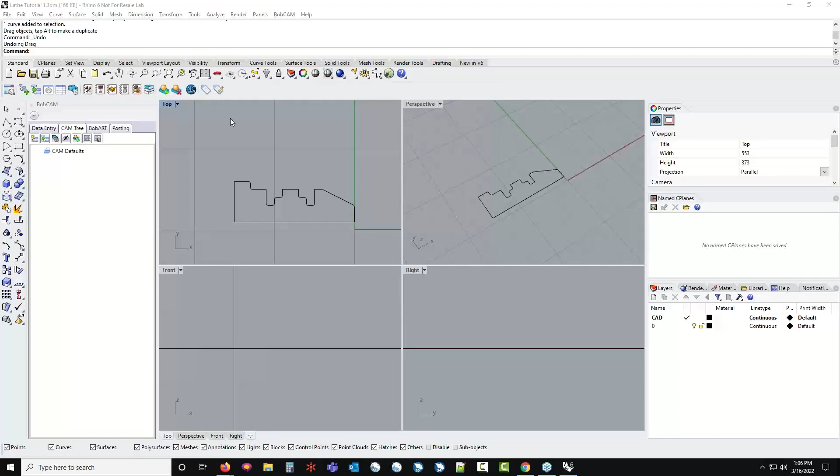So I'm just going to go right here to this top view. This is pretty much where I'm going to be for most of this. Now, I am not great with RHINO, so I actually drew this part out in our standalone software. It's just a part I use for a bunch of stuff. But I actually drew this out in our standalone and imported it as just a DXF.

So I had it all lined up inside of BobCAD in our standalone version, and then I just imported it into here. So I'm doing everything from the top plane. The only thing we really need to pay attention to is when we set up the job, we need to make sure we have our Z and X right here and not our X and Y, which the turning system should do automatically for us.

So I'm going to go up to BobCAM, and then I'm going to go ahead and load the help right here. So this should load the online help. It may take a minute with the way my computer's been acting. Hey, that's not that bad. Okay, I can deal with that. So I just want to pull this up, and I'll just make this big. I don't need full screen.

Every time you launch the help system in any version of BobCAM, but in BobCAM for RHINO here, it'll always take you to this introduction page. And right here on this introduction page, we're going to go down to Using CAM. Now, right here under Getting Started Machining, we have this Read Me First CAM Quick Guide. And I'm just going to open that up.

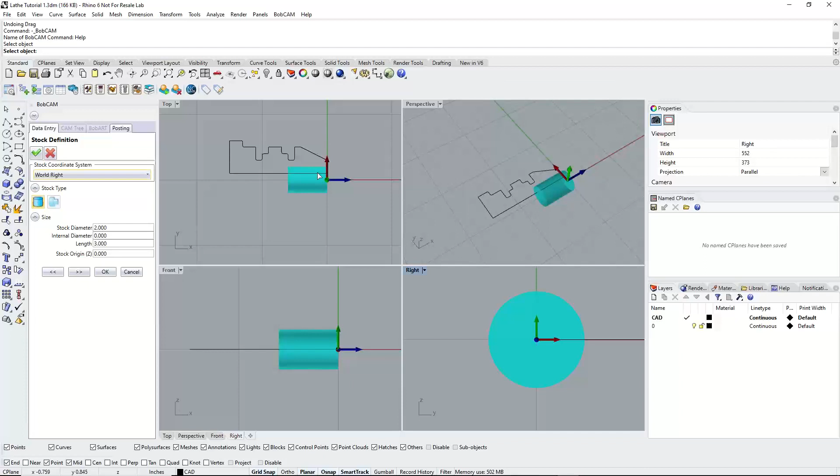Now, the first thing I like to pay attention to is whether it's showing up in the correct coordinate system compared to all these. You don't really have to compare it to all of them, but we want to make sure this is running down along what would normally be our x-axis for our top plane. But you have a choice, depending on how your geometry is situated. You could use the world right coordinate, the world front coordinate, or the world top coordinate, so it's whatever you want to use. I'm going to go with world right because that sets my z-axis down the center of the part and my x-axis along the part. So I'll go with that.

Now I'm going to bring it back to the top view here. So for my stock diameter, I'm going to go with 6 inches. And for the internal diameter, if there was a hole already in your stock, you would want to define that hole. You can see if I put this at, say, a half inch—let's go a bit bigger, is that three-quarters of an inch? This will help me anyway because I need to know what size that is. Looks like it's a 1-inch diameter hole down the center. So you'll see, if I go to my perspective view, a 1-inch diameter hole down it. That would be if you're starting with a piece of stock that already has a hole in it.

I only really did that because I forgot what diameter that hole was supposed to be, so it's a half-inch radius, 1-inch diameter. That works for us, so I'll zero that guy back out. And then for the length of the stock, you're just going to put however much you need. So if I say the length is 8 inches, that'll work. Now you could go a little bit more than that as well—something like 9 inches will give me that little bit extra so that when I do my cutoff, I'll actually see it cut off, and I'll see the rest of the material, whatever's left in the chuck when it falls off.

And then the origin right here—so right now the origin's at this center point, but if we want to do any bit of facing, we need to add a little material to face off.

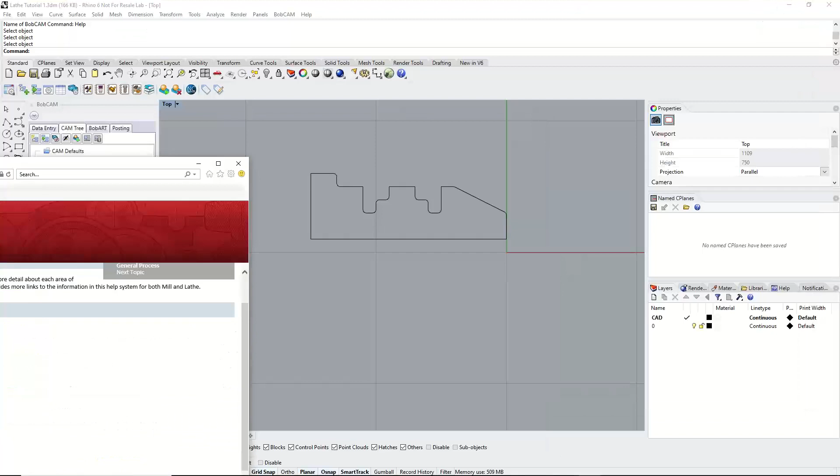Now, the other thing is in step 4 here, they go right into making toolpaths, and you absolutely could, but it does make life a little bit easier if we know what tools we're planning on using. Go and set up the tools before you start the job. So I'm not going to set up every tool, but I'm at least going to set up the tool I'm going to use for roughing and probably finishing and the grooves, which is most of the tools.

We'll just do it. So you right click here on turning tools, and we have a tool library and a tool crib. The difference between the two is the tool library — the easiest way to think about this is it's that shelf or drawer somewhere in your shop that has all the tools that you own. These are all the tools available to you. The tool crib is those tools being taken out of that drawer or off that shelf and being loaded into the machine. So I want to go to the tool crib because I want to then add tools from the library to the crib.

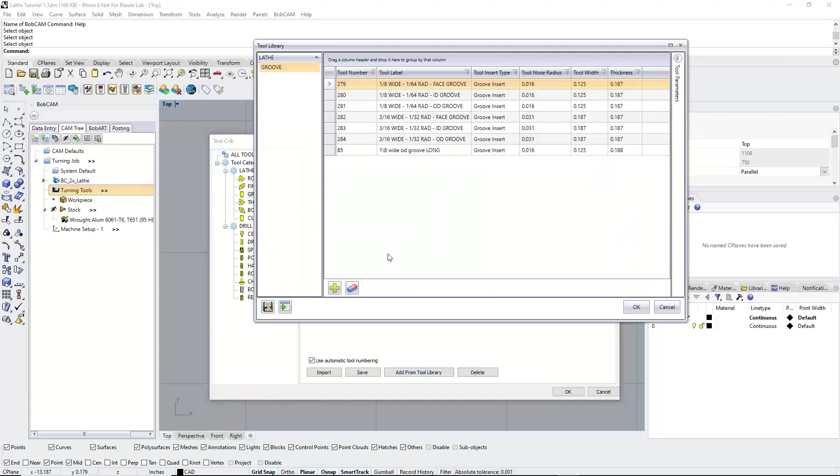So we're just going to go right here to our rough and say add from tool library, and I'm just going to go with a pretty standard CNMG right there. Top one should be fine, hit OK. We can use some pretty basic tools on this one. So for our finish, we're going to add from the tool library — this is going to just be a VNMG, and I'll hit OK. Now I want to go to my grooving tool and add from the tool library, and I'm going to go ahead and pick this one right here.

Let's take a look at this one. So if I open up and look at the tool here, this is an 1/8 inch wide OD groove, and I specifically put long, meaning the holder is a little longer right there. All I did to make that was make a new tool, and then when I was defining this groove, I went down here and said let's edit that tool holder. You can see right there, A is the length of stick out on that groove. So I can go in and say this is 1 inch, and it'll create it and extend it a little bit more. If I went 3 inches, like that, that would give me another tool, which we kind of have already.

That's going to be our cutoff tool. So I don't actually need this one. I'm just going to trash it real quick.

I'm going to pick my 1/8 inch wide, so it's an 1/8 inch width for the tool. The tool length is 1/4 inch tall, kind of the length of the insert. The side angle is just 2 degrees, and there's no tip angle. Our reference point's off the left corner there, and that's the holder we're using. If I edit this one, you'll see, yeah, it's 1 inch. So that's just adjusted. I actually think I did this part in the getting started videos for this thing, so that's why this tool exists already. I'll go ahead and just hit OK to add that one in.

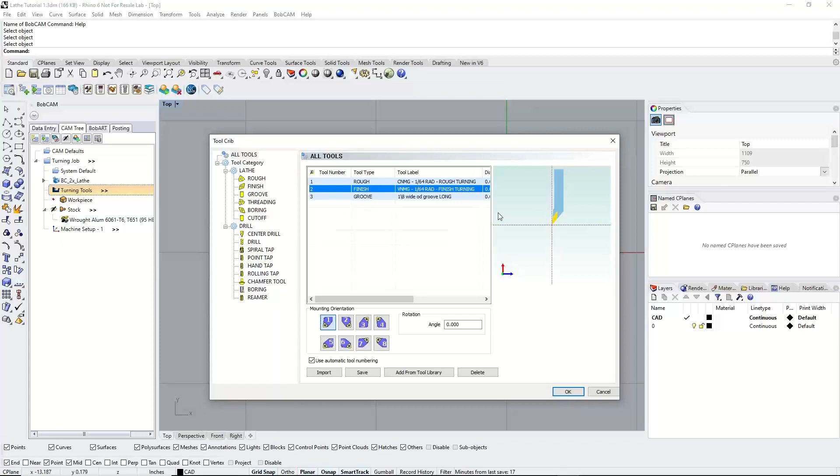So we have, if we look at all tools right now, we have our rough, just a CNMG. Finish, just a VNMG, which we honestly probably don't need. We could probably just use the CNMG, but that's not going to hurt anything. And then we have our groove for doing those 2 grooves. So really the last couple tools we need is a center drill and a cutoff tool.

I'll just add those in. The drill I'm not going to add in. The system will automatically pick a drill. It's going to be a 1 inch diameter drill, but it's going to go 7 inches or so, something like that. So we'll just let it go.

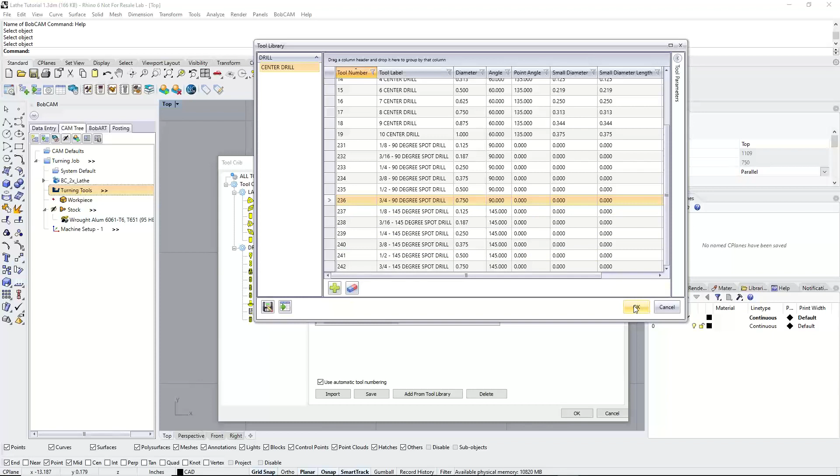We'll see it. So for the center drill, I'm going to go ahead and choose, let's go with a 3/4 inch 90-degree spot drill. Something pretty heavy. But I like using spot drills for my center drills, just so it gives me a nice clean angle. It's easier to calculate for a lot of things too. So I hit OK. There will be my center drill.

And then, yeah, we'll go ahead and just add a 1 inch drill. Now, when we do this, I'm just going to sort by the diameter here and scroll down until I find me a 1 inch, or sort by the diameter again. And we probably only have, yep, one 1-inch drill. Now with this, I'm going to double click on it and you'll see the entire size of it.

So you have a 1-inch diameter, 118 degree tip. The flute length on it is 6.375, but the overall length is 11 inches. So I want to go in and I want this to protrude out of the part a bit more because I do have a few more inches than that. So I'm going to say, I'll just do 9 inches. So we're holding on to 2 inches of it. 9 inches is sticking out, and 6.375 is what we have for our flute length.

We'll see if that's good. I might get a couple little gouges telling me that above my cutter, above my flutes, is touching the part, but we'll find out when we run the simulation. Again, I'm not putting any tool holders on any of these tools, so it's no big deal.

This is important though. So a minute ago, I was talking about our cheat sheet here that tells us to start the new CAM job and stock wizard and all that. But right here, step number 3 is set the stock material. The stock material is only used for feeds and speeds. So if you want BobCAD to figure out the feeds and speeds with turning, the only feeds and speeds we will calculate for are the center drills and drills, pretty much the same tools you can run on your mill.

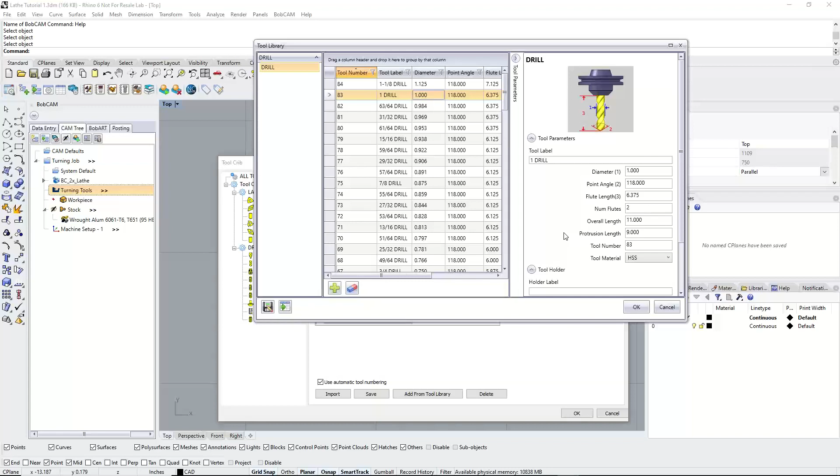So just going to go ahead and hit OK here. And there's that super long drill. And then finally, the last tool we're going to need is a cutoff. And I believe there's only one in here.

The length on it is 3.25. So if we look at the holder here, we only got 1.625. So this should be 3.25, and that's what it should look like. So it's basically a groove tool, but we use it specifically for cutting off. And my part's 6 inches in diameter, so I had to make sure I have a few inches of that. Shank length we can make.

Oh, that's the total length. Yeah, 3.25. All right, perfect. So we'll hit OK, and then hit OK, and there's that tool. So now we actually have a cutoff tool that can reach the center of the part.

And that's it. So if we go up here to all tools, we have 6 tools. Our rough and finish for most of it, our groove for the grooves, center drill and drill for the drill right down the middle, and a cutoff tool. So again, you do not have to do this. If you look at the steps, our little cheat sheet here, there's nothing in here that's telling you to set up all these tools at the beginning.

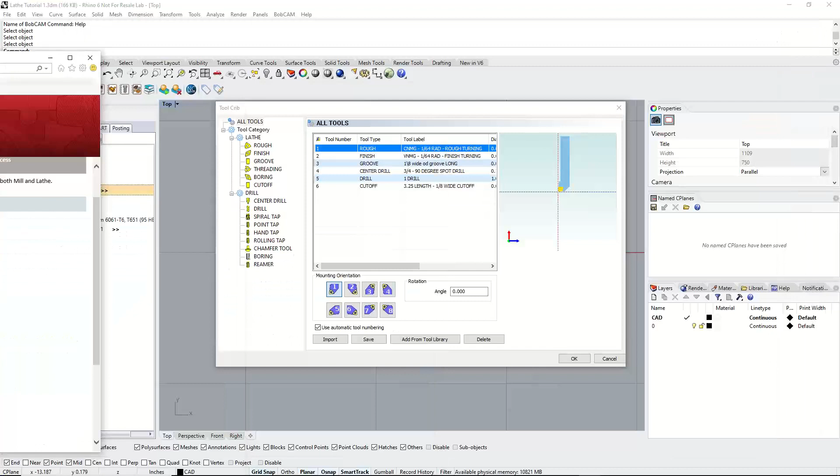But I found that if I don't have to think about the tools again, that's a great day for me. I know what tools to use when I'm roughing. I know what tools to use when I'm finishing. It all works out. So I do prefer to set up tools in the tool crib before I start machining. But I'll say that is not always the case.

There's many times when I was playing around with this earlier before lunchtime, before this whole thing started, I didn't change anything. I just started building it and making up tools. So there's 2 ways to go about it. I think setting up your tool crib first does help with kind of organizing everything and making sure it's all good. So I'll go ahead and hit OK. And now I have my tool crib.

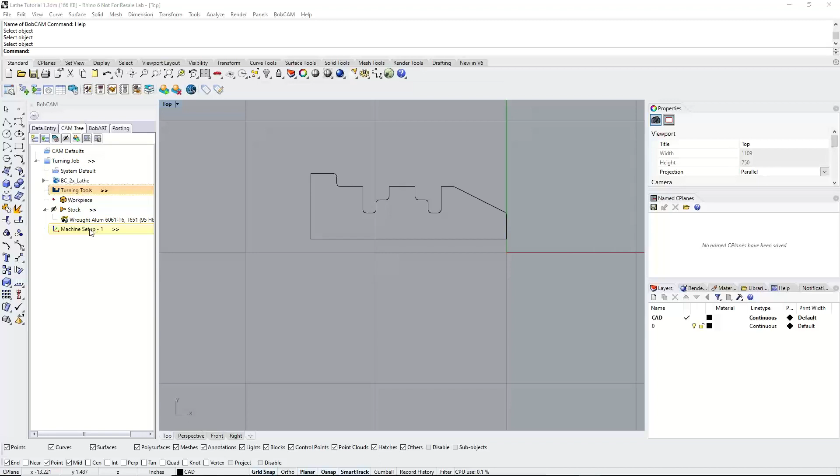From here, we have our stock done. We have our tools done. So now we are ready for step number 4. All right. So step number 4 is start making tool paths. We always go to the same spot to make a tool path. We're always going to right click on machine setup 1 here. So we right click on that.

And the first thing we're going to do is remember we added 100 thousandths to the front face. So that's what we're going to take care of first, that 100 thousandths off the front face. So I'm going to go lathe end face. For the geometry, I'm not even going to pick any geometry. I'm just going to let BobCAD figure out where the geometry starts, and it should have a pretty good idea of it. So we'll go next.

Now, because this is specifically a facing feature, we don't have to change our feature type. It knows it's working off the front face. Basically, it's only going to give us the settings for facing. So we can't change what face it is or anything like that. The rapid plane is the distance we're going to return to between each cut, so 200 thousandths. So as we make our first cut, we're going to go 200 thousandths, come in, make our second cut, 200 thousandths.

The constraints for this one, you get from stock or from custom. I always go with from stock, especially on a facing pass. The only time I really change this option is when I'm doing grooves. And I'll show you that here in a few minutes.

Now, the extension allows me to extend past the center point or start before. So we'll give ourselves an extra 1/8 of an inch. So it should see the stock and start an 1/8 inch above it. And then at the end, we're going to go past the center by, we'll just say, a 1/16 of an inch or so. And that'll just get rid of any little tit that's left on there.

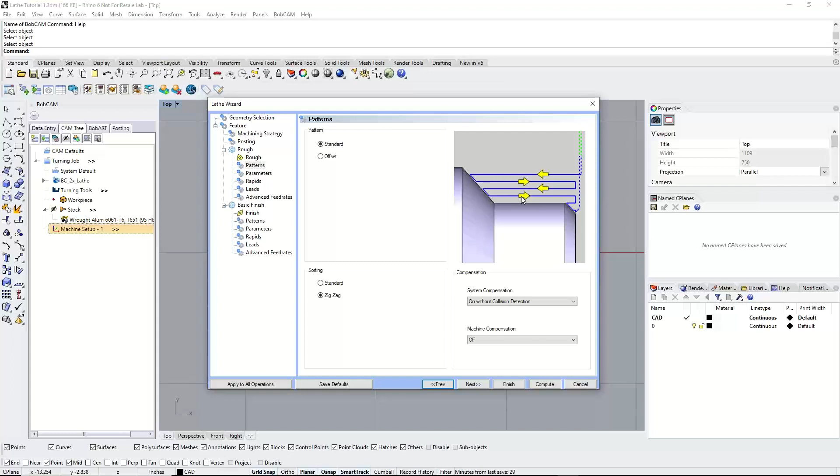The last option for sorting is the zigzag option. Instead of doing a zig where you go in one direction, you'll do a zigzag where you go back and forth. So you got your forward cut here and then a back drag cut there. So you got to make sure you got the right tooling selected for this. When I've done this one, and I've only done it a couple of times, I've actually used more of a grooving tool than a CNMG or something. So I'm going to go with standard and standard on there.

For the compensation, I don't usually use G41 and G42 on a lathe. I like to let BobCAD handle all the compensation. So up at the top, we have our system compensation. That's exactly what that means, that BobCAD is going to handle compensating this tool. Now you have three options for that.

Off, which is basically a center line cut. You're just going to follow the geometry in the exact shape we made it. Usually when you're using off, you're going to be using some form of compensation, a G41 or a G42. That's totally up to you guys. Like I said, I don't really use them. A bit of it comes from the fact that it doesn't show properly in BobCAD. It needs that compensation applied to it already, but I'm going to leave that one off.

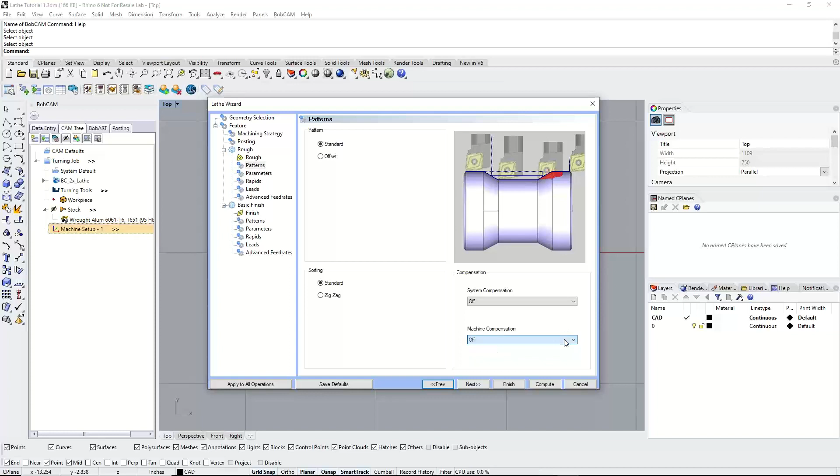The other one is called on without collision detection. So this means we are going to compensate for the tool, but we're not going to look to see if it's crashing into anything. Like that picture shows, the back of the holder and the back of the tool end up dragging across that section.

And so the one I use, because I'm not lying about my tool, this is a pretty standard tool. It's a CNMG. As long as you're not trying to trick it into thinking you've got some tool that you're not really using, the best option for me is always on with collision detection and tell it to use the tool holder. So it'll adjust the path so that the holder is clear of the part. And that's the setting I'm going to turn on pretty much every time.

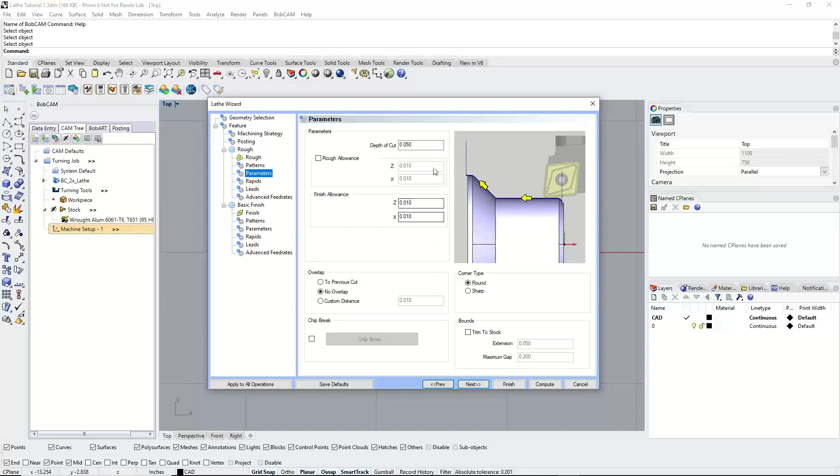So next right here, we have our parameters. This is where we see our depth of cut. So whatever you're comfortable with taking out in one pass, or whatever you're comfortable with the tool taking, that's what we're going to set up here. The allowance, this finish allowance here, this is the amount of material that's going to be left over for our finish tool to clean up.

Right here, we have some overlapping options. So how do we make our cut? The default is no overlap, and this is what you'll use. The default for facing is no overlap. But when we get into turning, what happens is on no overlap, you make your cut, you leave. You make your cut, you leave. So you can picture the finish that's going to be on here is going to be very steppy. There's going to be a lot of steps in it, kind of a rougher finish.

Now, to previous cut and custom distance, what those are doing is leading out to the previous cut, or custom distance is a certain distance that you can use to blend. So no overlap is leading out here. To previous cut on this same line is actually leading out all the way up here. This lead out that we're seeing here is for this line down here. So it's going to cut that line, feed up this, and then leave. And as you can see, that's going to leave a much smoother finish on the part. And it really doesn't add that much time to it. It doesn't really matter for us on a facing pass, though.

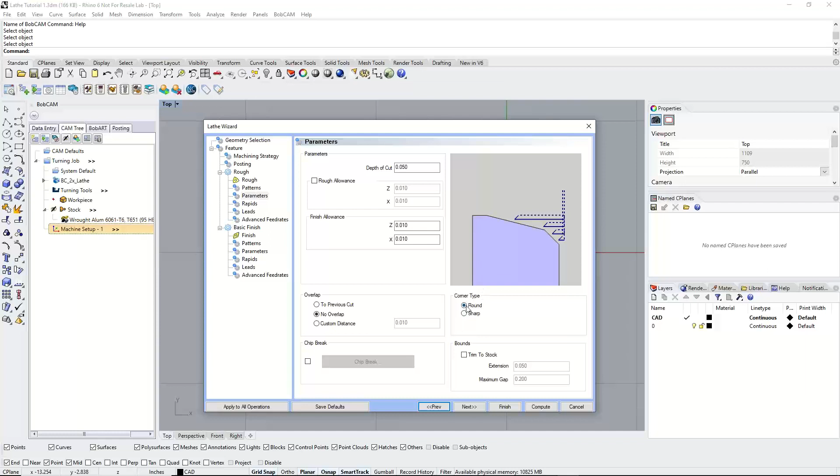Corner types, again, some of these options don't really affect a facing toolpath specifically because a face is just going to be a straight cut. So there aren't any corners on it. But if we look at the corner type options, these all apply to the next toolpath we're going to see, so it's not that big of a deal.

With this, it's just how do we interpolate corners? Do we go with a radius and make an arc move, or do we go with a sharp? Regardless of what you choose, you're going to get the corner that's drawn. This is just how do you want your code to come out? Sharp or round. It just depends on the code. But if we use round, that corner is not going to get a radius applied to it. If it was, then it would ask us what radius we want to put on it.

And there are some features like the cutoff that will allow me to put a radius or a chamfer on while I'm doing the cutoff. Right down here, again, one of these options I rarely would ever use with a face, but it's called trim to stock. Now, trim to stock is a good one if you're going to be turning a part that's maybe had some pre-turning done or maybe a casted part.

What you'd want, though, is two models. One model that represents the final finished part and another model that represents that stock. So if you look in the picture, it's real faint here, but there's stock right in there. And if we don't trim to the stock, then the toolpath is going to cut a bunch of air. But because this part's a casting or whatever, it already has a lot of that material gone. So you could say trim to the stock size, and it'll only cut where it needs to cut.

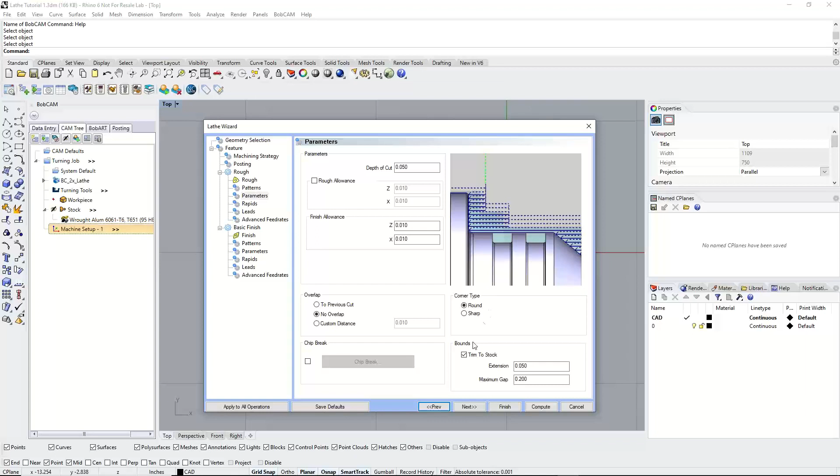All right. So I'm just going to go ahead and hit next right here for the rapids. Now, the next few pages, the rapids, the leads, the advanced feeds, we're not going to make many changes at all. The approach that we have, I'm going to use the default rapid approach. And on the exit, I'm going to use the default rapid on the exit. Now, my goal with most of these pages, honestly, is to change as little as possible. A lot of the settings are in here because they work. They work a lot of the time. So I'm going to go with the defaults on this. And if they don't work, I can always come back and change them. But there's a good chance they work.

But as we're talking about it, you can see we could come from the OD clearance plane, the ID clearance plane, or the face clearance plane. You could also rapid to defined points. On the exit, you have a rapid on exit to the tool home, to the cycle start, or to a defined point. Now, you'll see these letters afterwards, the X-Z or Z-X or just ZX. X-Z means X is moving first and then Z is moving. Z-X means we're moving Z then X. And ZX is both of them at the same time.

All right. Going to that home position, which is defined right here. Now, you may have to change the home position, but just so you know, the home position is actually stored when you build the tools. So if you ever need to change it or you want to change it for certain tools, you need to go to that specific tool in the library. And if you scroll down to the bottom, you'll be able to change the home position. Again, with something like this, though, I don't really need to change the rapids. I'm just going to go with the default rapid on exit.

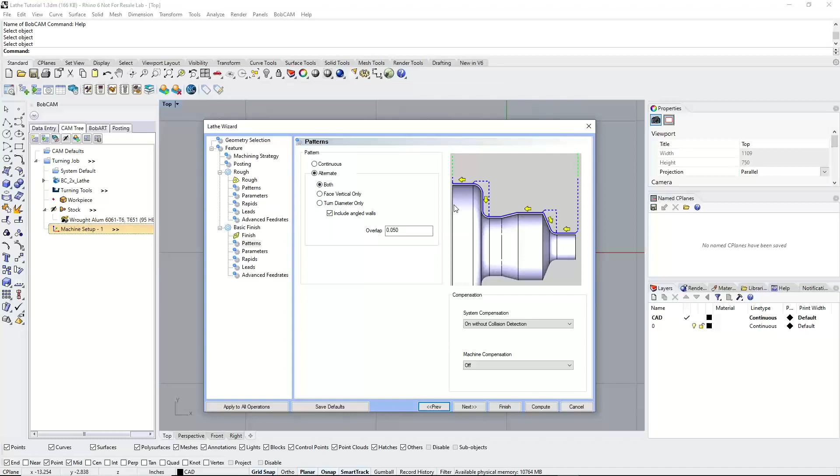Not bad, but I'm going to go with just continuous. This is a facing pass anyway. For the compensation, I'm going to say on with collision detection using the tool holder. And we'll go next again. Right here, there's not many parameters for a finish pass. If we were leaving material that we're going to come back and clean up later on, then we would add a value into here, 10 thousandths, 20 thousandths, whatever. But we're not. We're trying to finish it to size. So that's going to be a 0.

For the chip break down below, again, you could do a chip break. You could change your corner type, or you could trim to stock. But we don't have any of that stuff. So next. Here's our rapids. Again, let's use the defaults. Our leads, going to use the defaults. And the advanced feeds, going to use the defaults.

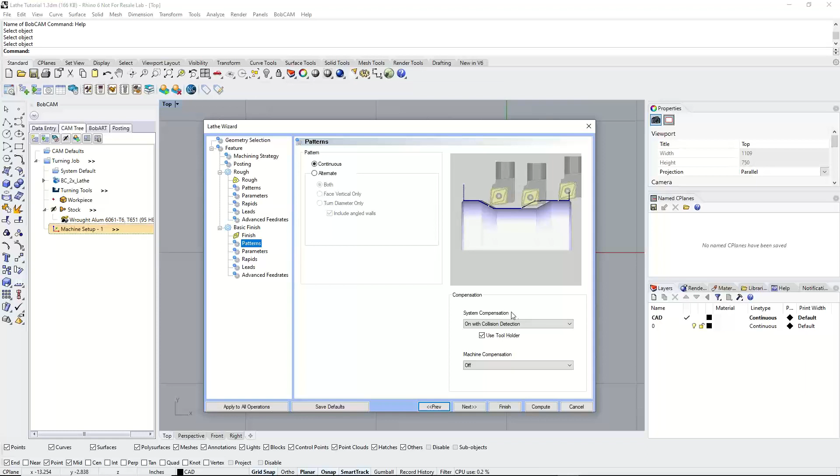Now, be aware that this option right here, the compensation option on the patterns page, does make the toolpath take a little bit longer to calculate. But for me, it's worth it because it adjusts the path to make sure everything can cut properly. So I'm just going to go ahead and hit compute.

And this is taking a while just because my computer is not happy the last couple days, so I'm just dealing with that right now. So, all right, we're going to let this finish calculating here.

Oh, Mark, you're back. Yeah, it says you popped offline here a minute ago. Not sure what's going on. Did we kick you off, or was it your internet?

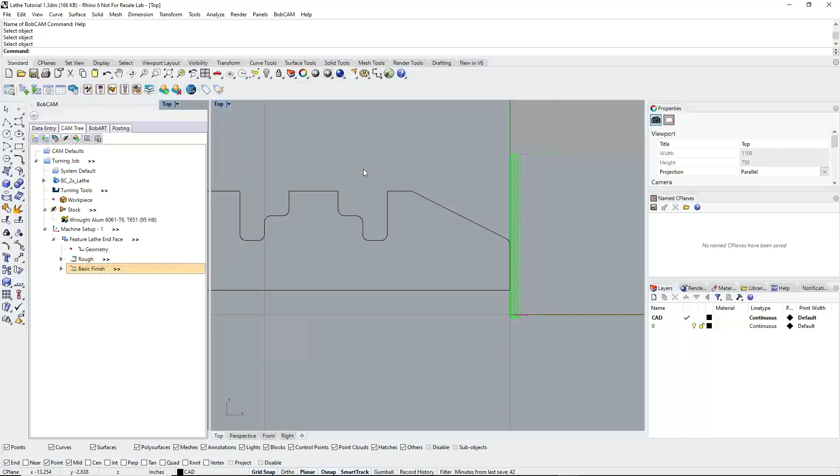And there is our toolpath. It's just going to go in and make the cut. Give me 1 second. I want to look at some settings for BobCAM here. Move over a little bit. There we go. Did I get it? All right, good. I thought this had the new cam tree in it. What is going on?

All right, give me 2 seconds. I want to go to, where is it? Settings right here, current settings. That's not the settings I wanted. These settings, I believe. User interface, office blue, okay, cam. All right, there's classic, that's what I've been looking at. I want to go to the extended cam tree here. And I want icons. I want it all to the right. So yeah, let me hit apply. And okay, that's what I want to see.

Oh, you're on your phone. I got you. Cool. All right.

So right here, I just extended my cam tree so I could use these blank and unblank options. I don't remember when I would have turned that off, but apparently I did at some point. So yeah, it lets us visualize a little bit better what's seen and what's hidden.

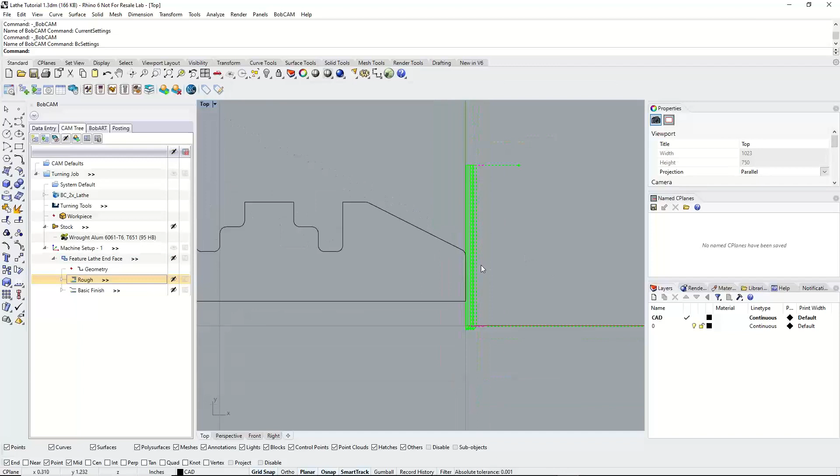So if I blank this out, there we go. We have our rough pass right there. So you've got all those passes, a few of them, and then our basic finish right there. You'll see we're going past the center line by just a little bit there, and that's good. So now I'm just going to shrink that one up. That's how I know for myself that I'm done with it.

So now I'm going to right click on my machine setup one, and this time I'm going to go to Lathe Turning, because what I want to do is turn down all of this geometry. Now notice I'm going to pick everything.

I just have to pick the little fillet in the beginning there, that little fillet there, and this edge right here. And look at the chain, you'll see we're starting here, going around.

Now you'll notice I picked the grooves. We do pick the grooves in BobCAD because when I hit OK and hit next, on this feature page here, we have this undercut section. Grooves are seen as undercuts for the system. So we can say, let's go ahead and remove primary undercuts, and what that does is tell the system to ignore any turn grooves. If we were to say remove secondary undercuts, you'd be removing any face grooves that are on your part. If you have them both checked, you're removing all turn and all face grooves.

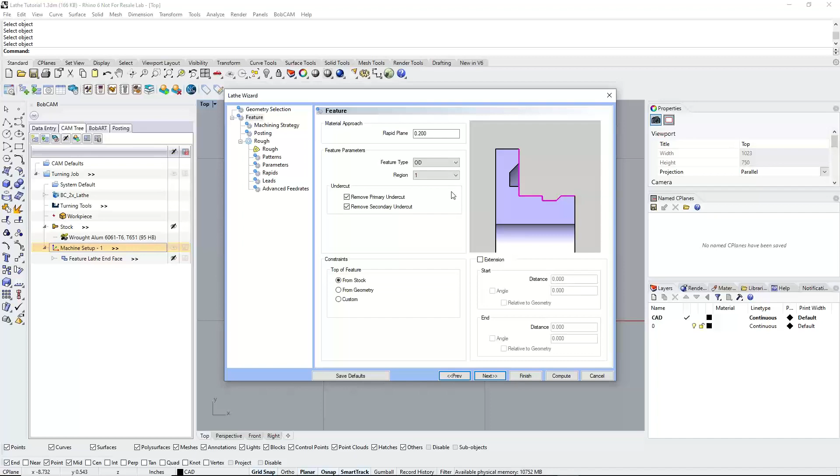Now, if you have angled grooves, there's no way to ignore those. The only way to really ignore some sort of angled groove would be to draw a line across it and then pick that line as part of the geometry. So it works for turn and face grooves, but if you have any angular grooves, you'll have to draw a line over that. So I'm just going to turn both those on. I don't have any face grooves, but it won't hurt anything.

For the rapid plane, it's 200 thousandths for our return every time. We have our feature type. So this is actually one of the easiest ways to control the tools.

So I'm doing an OD cut, so it's kind of aligning my tools as if I was cutting for an OD part. If I was to say ID, it's actually going to rotate and flip my tool around so it's facing the correct direction. We also have our front face options and our back face options.

And you could choose with OD, I could say OD region 1 is kind of the, we'll say the right side closest to the face of the part. Region 2 would be working more close to the chuck of the machine. So you'd be coming in and machining your way out. Basically, it's the flip of your tool.

So right here we have our constraints. Because this is a pass, this turning pass, that's basically going to be my material removal, my big material removal. I'm going to tell it to use the stock as the top of feature, so just recognize the stock and go machine it away.

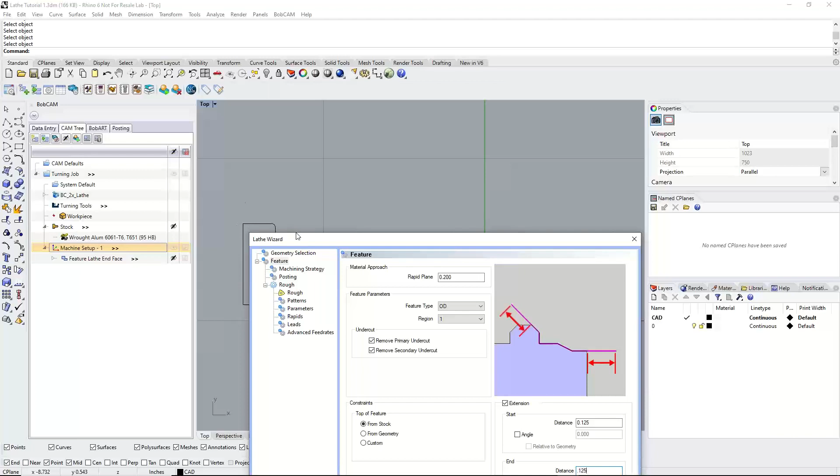The other thing I could do is add extensions onto here as well. So if I want to start a little bit before the beginning, kind of get the tool in position before, and maybe go past the end of the part a little bit. So I'll go, let's go distance, we'll just do an 1/8 inch. That should just extend this to go past here, just a little 1/8 inch more. That's helpful if you're doing a cutoff. My stock right now is 6 inches, so it really doesn't matter. I'm just going past it a little bit more.

For the machining strategy, once again, we're going to go with a rough/finish. You also have options for a pattern repeat, which is basically the finish pass being offset and dropped in, so you're following the same shape every time. I'm going to go with rough and basic finish here.

Next, right here again you have separate moves or canned cycles. That's really going to be dependent on the post-processor.

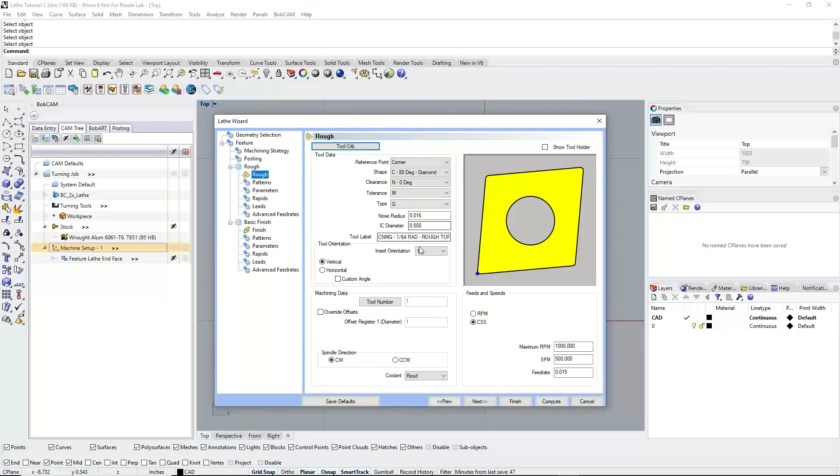Right here, we have our roughing. So again, I'm going to use my CNMG to rough it. No changes pretty much on that page unless I was changing feeds and speeds. That's got the tool, it's got the right orientation. You can look at the tool and the holder together right there. Looks good, so we'll go next.

For the patterns, again, just like with that facing toolpath, this is essentially this roughing and basic finish toolpath anyway. In the old versions of the system, we didn't have just a specific face.

The main reason why there is a specific facing toolpath is because it automatically recognizes the geometry. It will automatically go in and do that face cut, recognizing how much material is there, and then you just go cut it off.

It's the same options. You've got your standard and offset for your pattern, and standard and zigzag for your sort. I'm going to go with standard, and I'm going to say on with collision detection using the tool holder. That's a setting I turn on all the time.

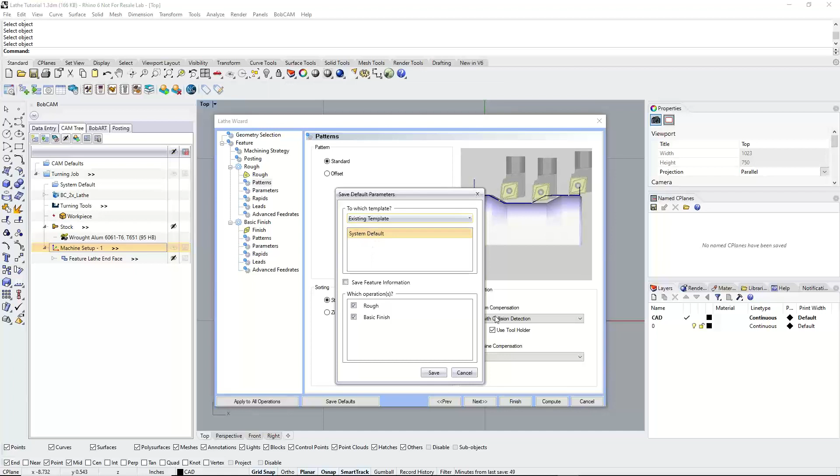I don't usually do any saves on, well, this is my work computer - I save stuff on my personal stuff. But if you know this is an option you're going to use a lot, you can come in here and say save defaults. You can save it to the current template, or to an existing template, which overrides the setting on the system level, on the default level. Every time you do this, it'll have that. You'll say you want to save it for your rough and your finish. For me, a shortcut so I don't have to change it on the next one...

...is this button down here in the bottom left: the Apply to All Operations button. So Apply to All Operations is going to copy the settings from here to these settings down here. It just copies it over so I don't have to make that change twice at least.

After that, we'll hit next. We have our parameters - depth of cut, again, whatever you're comfortable with. The allowance, you have two different allowances. The rough allowance is used basically as a rough pass. I use this when I do the pattern repeats. But for this one, I'm just going to go with a standard normal allowance, leaving 10 thousandths on every surface, and that's what my finish tool is going to clean up.

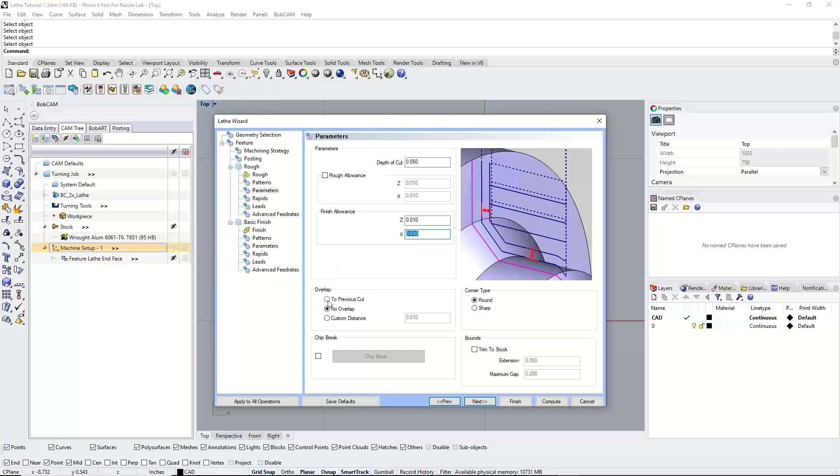On the overlap, I like to use previous cut when I'm doing these cuts here, just because it gives me a semi-finished part before the finished pass comes in. I'm not going to have a bunch of steps in there from the initial roughing.

On the chip break, I'm not going to do any chip break right now. Corner types, no changes. And then the bounds, we could say I want to trim to stock if we had a model that represented that. We don't have that model - though you can get that model from the simulation and actually use it. So I'm just going to hit next for now.

For the rapids, again, we're just going to use the defaults. There's no point in changing it if we don't have to.

Right here we have our leads, so we could go parallel or angle. Again, just going to use the defaults. If they cause a problem, I'll fix that problem, but they usually don't, so no point in changing them. Advanced feed rates, no changes.

And then there's our finish. Once again, we've got our VNMG right there, 64th rad - what we planned on using for finishing anyway.

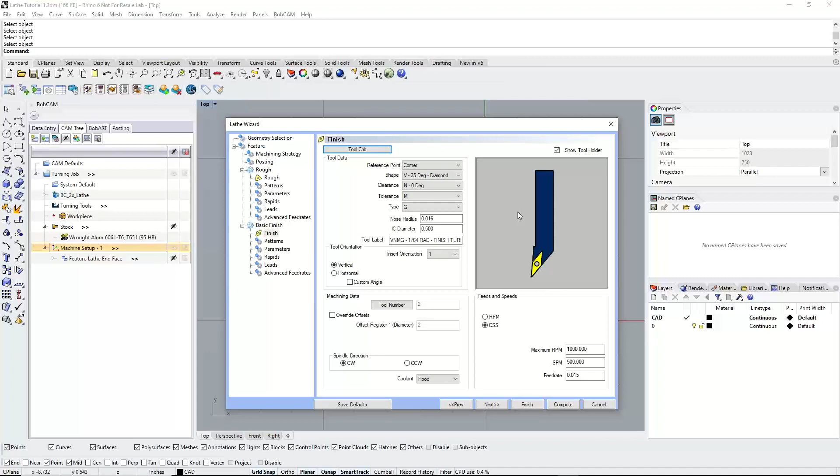Next, for the patterns, I'm going to go with a continuous cut, but again, you could go and do that alternate cut where you do the face verticals separate from the turn diameters. System compensation is set because I used that Apply to All Operations button there.

The parameters - we have our finish allowance set to 0, so we're finishing it right to the wall, and our X allowance right to the floor. So it should be a nice finish here.

Next, on the rapids page, we have our default rapid on the approach, default rapid on exit - we're going to use that. Leads, parallel, angle, both set to 100 thousandths - we're going to use that.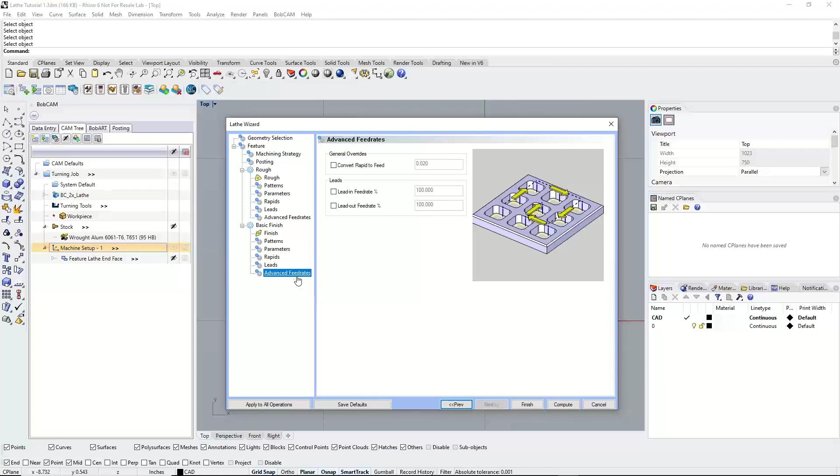Again, try not to make these changes if you don't have to - it makes it a few less things to worry about most of the time. And again, advanced feed rates, no changes. So I'll hit compute, and again it will take a little bit to compute, but it shouldn't be too outrageous.

If your computer's not having a bad day like mine is, it'll actually compute faster because it's not having a bad time. I'm supposed to be getting a new one soon. I just keep holding onto this one.

All right, so here is our rough pass. We're just going to go in and rough all that geometry out of there. And then we have our basic finish, so we'll just turn and cut.

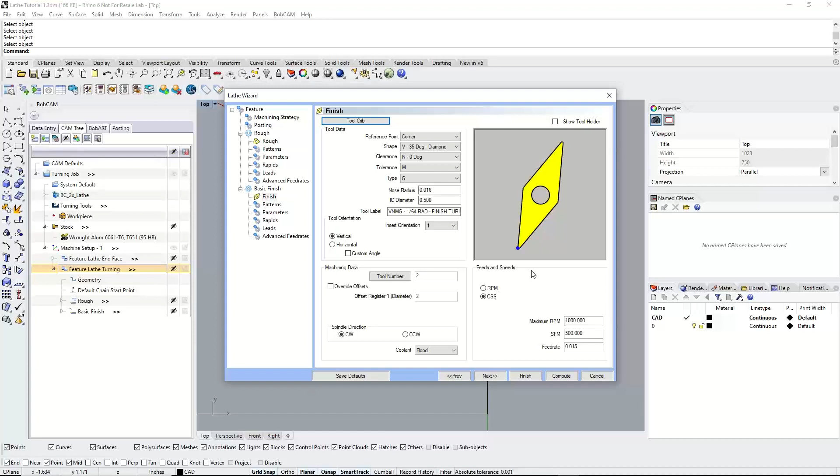Now a lot of guys get nervous when they see this, the toolpath inside the geometry. The reason it looks like that, and I can show you this, is because all the toolpath is based off that point right there, the hypothetical corner on the tool. It's what you're calculating when you're setting your tools up anyway. Excuse me, oh I didn't mean to hit compute, sorry guys.

So if I right click on this basic finish here and say backplot, my tool is going to be up there. Let me next my way into here. Next, so there's my tool, I'm going to turn it shaded. You'll see as we touch, the hypothetical sharp corner is actually this corner right here. So when we get up to that arc, the reason it's like that is because that hypothetical corner is down further. That's what we're calculating everything based on. So when you see a toolpath inside the geometry, it's not a bad thing, it just means the edge of the tool is cutting along the geometry.

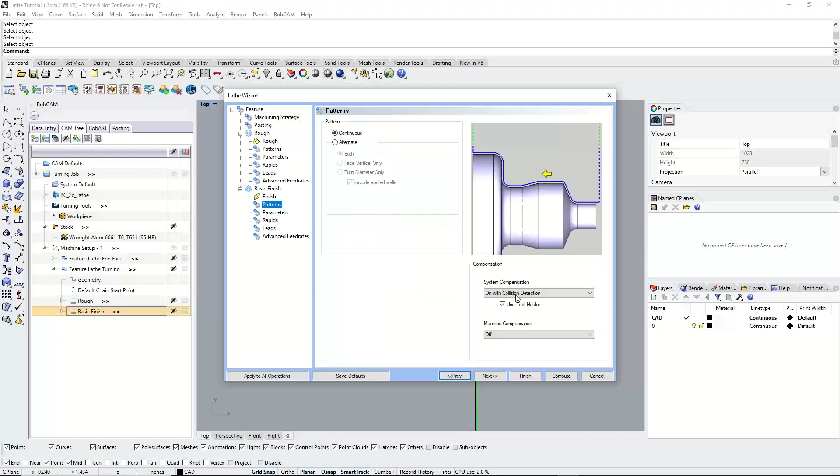So yeah, there's the only other way to get it to run without doing this - this is that compensated tool. If you go in and change this, let me edit this right here. If I go down to the patterns on this one and just turn this off and hit compute, the rough still has to compute, but the finish is now going to be pretty much instantaneous.

So now as the tool runs, I'll backplot that. There it is - when we get to right here, the tool isn't actually touching the part, it's not touching that wall. That's because normally you'd be coming in and then compensating it with a G41 or a G42. So I'm going to turn that system compensation back on, and I'll just recompute real quick.

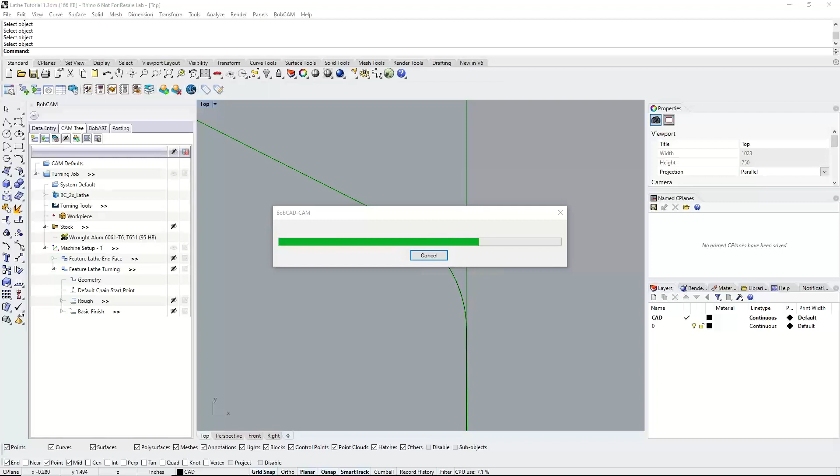All right, and there we have it. So there we go, looks good. All right, now we'll go ahead and just shrink that up, and then the next thing is these grooves.

So for the grooves, I'm just going to right-click and say Lathe Groove. We'll select our geometry, and I'm just going to drag a box over this stuff. Whoops, didn't mean to grab that one. Just going to drag a box over those two areas, and then I'll fill in the gaps I missed. There we go, and we'll look at our two chains.

So we'll see both of them right there. You can do both your grooves at the same time, or you can make them separate features if you wanted to for whatever reason. If you were going to make them separate features, the way to do it would be to just program one and then copy and paste the toolpath for the other. But you don't have to - you can do both your grooves at the same time nowadays.

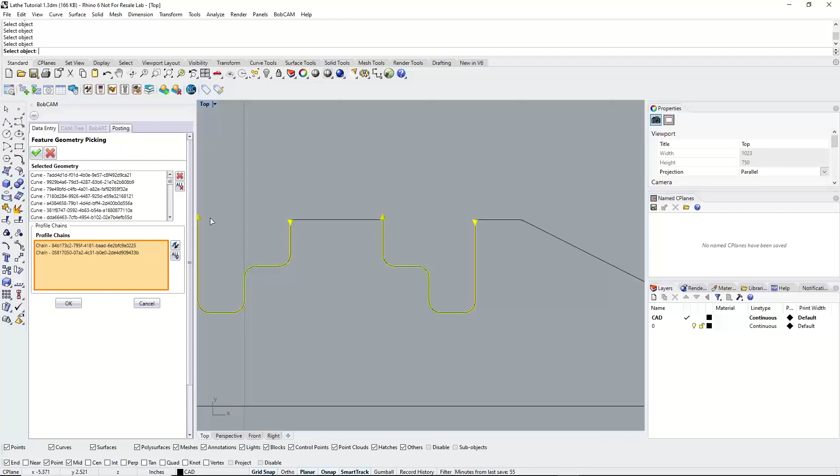So I'll hit OK and go next. Right here's our rapid plane once again, so that's pretty much the height at which we're going to return when we connect these two grooves. They are OD grooves, we're doing region 1. Region 2 would be kind of flipped the other way, so your tool would be flipped 180, but we're going to go region 1.

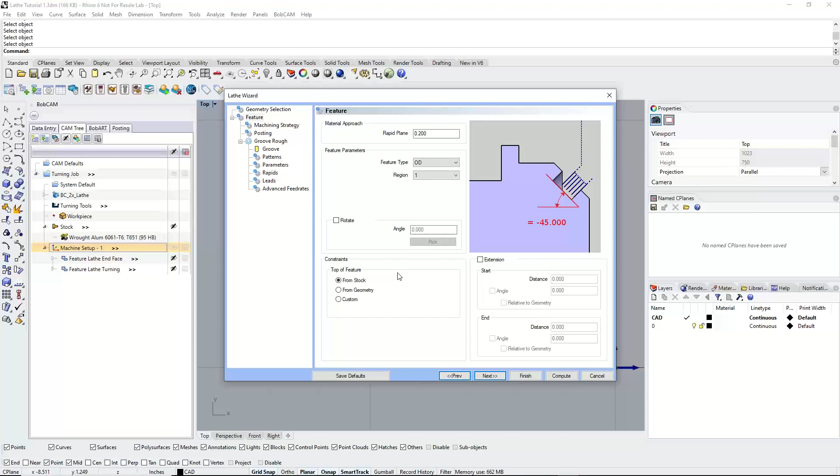If you did have angled grooves, you can actually set the angle of the groove, and then set up your tool to match that angle when you go in and cut it. But for the constraints, for just about everything - your normal turning, your facing, pretty much everything - you're going to go from the stock. But for the groove, we want to go from geometry. What that's doing is looking at the height of the geometry we picked, and that's where it's starting all the toolpath. If this was up any higher, if we had this extended up, it would actually start the groove higher - so it's actually looking at the geometry.

And so I'll just go next. I don't need an extension on this one. We'll do a groove rough/finish, which is going to go in and rough the groove out, and then add just a little finish pass to it, just something to clean up that groove.

Next, again, we have our posting, separate moves or canned cycles, all dependent on your post. For the grooving tool, if I show my holder, that should be it. It doesn't look like it's as long as the one I made, is it? Oh, yeah, look, it picked two different tools. We got tool 7 and tool 3.

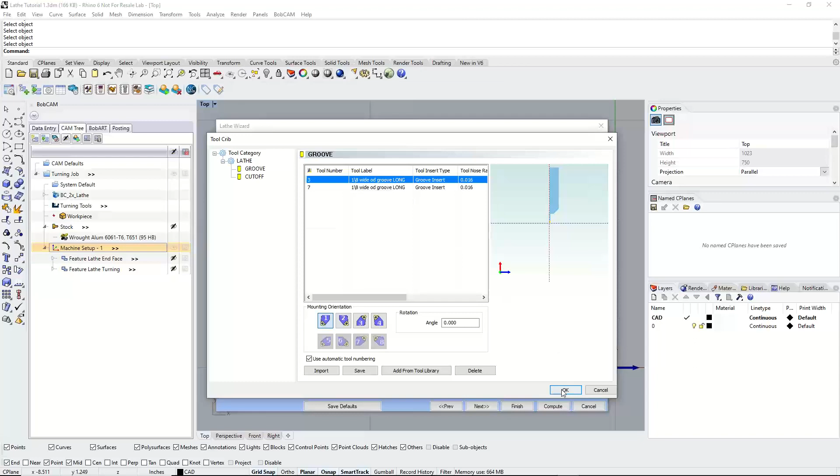Not sure why tool 7's in here, but we're going to go in and make sure to pick tool 3, because that's going to have that longer stick out on that groove part of it. Not sure why it grabbed the other tool. It grabbed the same tool, which is weird, but next.

Right here for the patterns, we're just going to go with a standard cut, but you have other options. If you have a custom-made grooving tool that is made to cut a specific shaped groove, you can use single pass. And that's just going to press into the groove, come back out, and that's it. Your standard cut is going to plunge in. Just plunge in and make the cut. And with that, you can do a standard cut.

So you're going to go 1, 2, 3, 4, 5. You can do a center out. So you're going to start in the middle of the groove and then work your way out from the center there. You can do a center out alternate. So you're going to do 1. And then in this case, if you look at the picture, we go to the left. Then we go back to the right, back to the left, and back to the right.

And then finally we have skip. You're going to cut one, skip a section, cut it, skip a section, cut it, and then go back and clean up the areas you skipped. Now the other option for the pattern is a zigzag. And a zigzag is going to go in and zigzag the groove. It's going to cut its way down. I'm not going to run that.

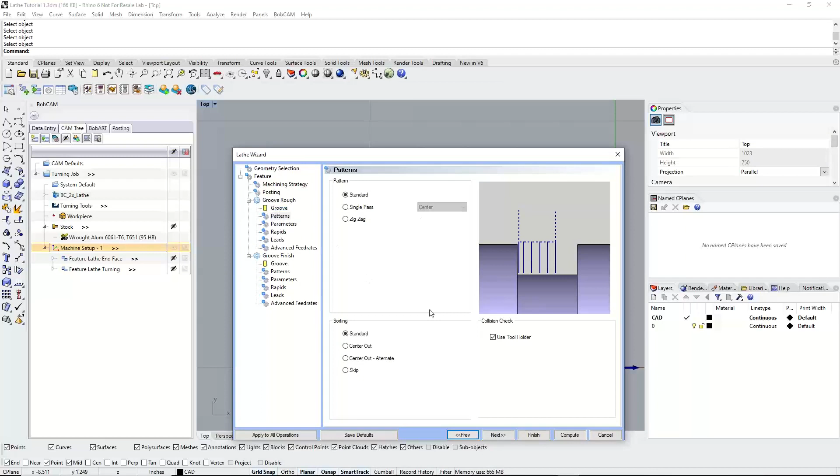For the collision checking, or basically the compensation on this, I can turn on use the tool holder. And this is a good one for if I'd accidentally not paid attention to the tool length that was sticking out on there, and I picked that tool that was too short to get to the bottom. This option would have actually shortened the tool path basically to the level that tool can cut. It wouldn't go to the bottom. It wouldn't force it to gouge. It would stop as far as it could possibly reach.

All right, so we'll use the tool holder. That all looks good. We'll go next. Right here, again, we have our step over. What are we comfortable with it taking out? I'll say 60 thou, about a 50% step over there. For our allowance, we're going to leave 10 thousandths for that finish pass to clean up. And right here, if you're doing some deeper grooves, you could tell it to take out multiple depths. You could do a depth of cut at, say, groove it at 100 thousandths, and then the next 100 thousandths, and the next 100 thousandths, and work your way down.

For processing, we can go by area or by level. And so you can see by area is probably the most consistent, probably the way I usually would do it. You're going to cut, finish an area, and then move on to another one. By level is going to take everything down at the same level. So you'll do step 3, then you'll come back, do 4, and then 5. But I'm going to go by area.

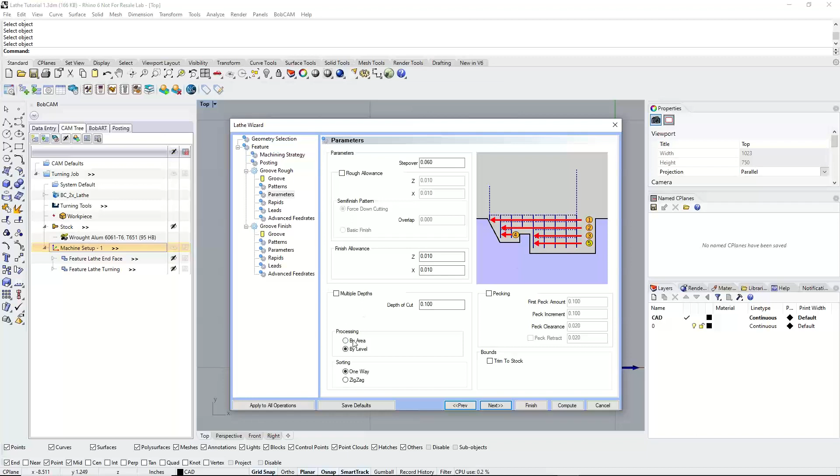For the sorting, we have one way or zigzag. So if you're doing multiple steps or you're doing anything like that, you could say, make a cut this way, then drop down, make it back, and just kind of go back and forth. You're still plunging the same way. But again, that's usually going to be used with the multiple depths option.

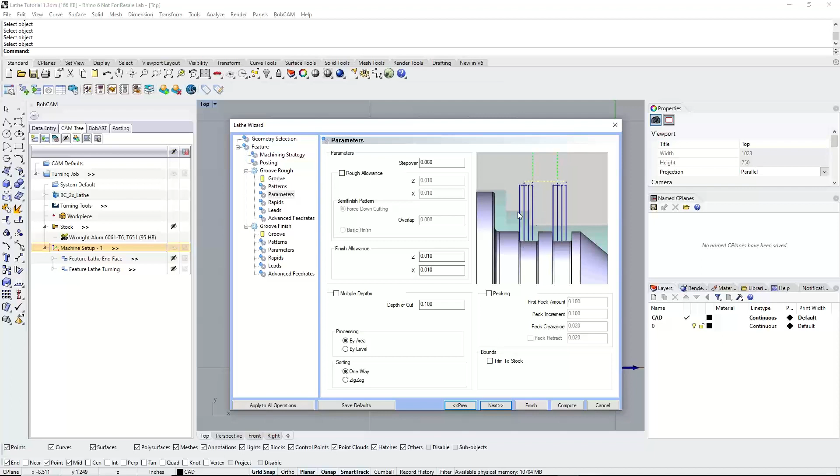Right here we have pecking, and so pecking is going to let us peck our first amount. So what's our first peck going to be taking? What's our increment after that we peck? And what's our clearance? So what do we retract every time we do that peck? And then right here we have our trim to stock option. So again, this would just trim it so that it recognizes where the material is. But our constraints option will actually pretty much do the same thing for us, so not a big deal.

Next, we have our rapids. Again, going to use the defaults. Not going to make any changes to this one. For the leads, we only have one option. It's parallel leads, and they're set to 100 thousandths. So unless 100 thousandths isn't enough, you really don't have to change this. And then advanced feeds. For the groove, I'm going to use the same grooving tool. So tool number 7 here is not the right one. It's tool number 3.

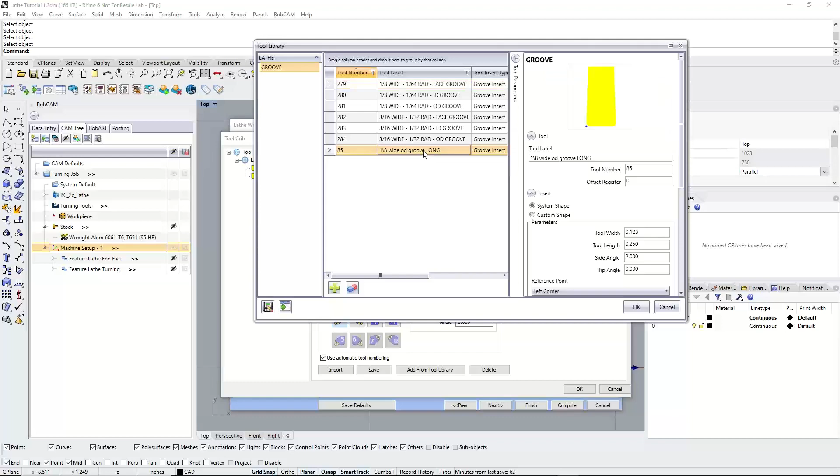And you'll see when we pick tool number 3 and I hit OK, if we go back into the tool crib, tool number 7 disappears because that wasn't a tool that was chosen by us. It was a tool that was chosen by the system. I don't know why, especially since the tool we selected is the only one in the tool crib with that name. And we edited the holder. So I don't know where it got that other tool and holder from. It's a weird one, but we'll run it this way.

Next, we have our patterns. So we got force down cutting. So from both sides of the groove, we're going to come in and cut to the middle and just kind of overlap. And you could actually put an overlap amount between them. So I could say I want to overlap by a 1/16 of an inch in the center there. We also have basic finishing, and basic finishing is just going to plunge in. You're just taking off whatever's left over, 10 thousandths. So it's going to feed in, cut around, and back out. I'm going to go with just a basic finish.

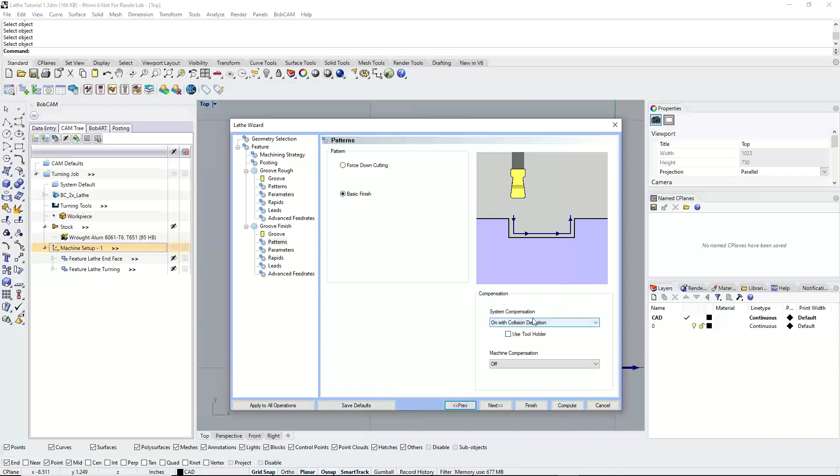We do have our compensation again, only this time it's just off or on with collision detection. There's no on without collision detection. So I'm going to say on with collision detection using the tool holder. For the parameters, I'm just finishing everything, so we're going to leave that stuff at 0. The corner types, we're going to go sharp or round. Again, it does not change how the corner is going to come out. It's the interpolation on the corner. All right. Now we'll go with round.

Next, we have our rapid. So the default rapid on the approach and the exit. Leads, going to go with the defaults. And advanced feeds. When we're all done, I'm going to go ahead and hit finish on this one, just because. And then that way I can go up and just say file save. I believe I have it saved. Yes, it's in there. Cool. And now I can go and compute that toolpath. Instead of hitting compute, I hit finish just so I could save it between them, just in case something happens during some sort of calculation. And let that run.

All right. So there it is. We're going to go ahead and hide that. And then here we see there's our groove rough, there's our connecting right there, and our groove finish right in there. So we're coming in from this side, going there, coming in from this side, going there. Now you'll see this adjustment here. Remember, that's because we're using that hypothetical tip. The hypothetical point on this is to the left of the cutter. So the left side of the cutter is what's going in here, and the right side is what's actually cutting the wall. So we'll shrink that up. We're done with our groove.

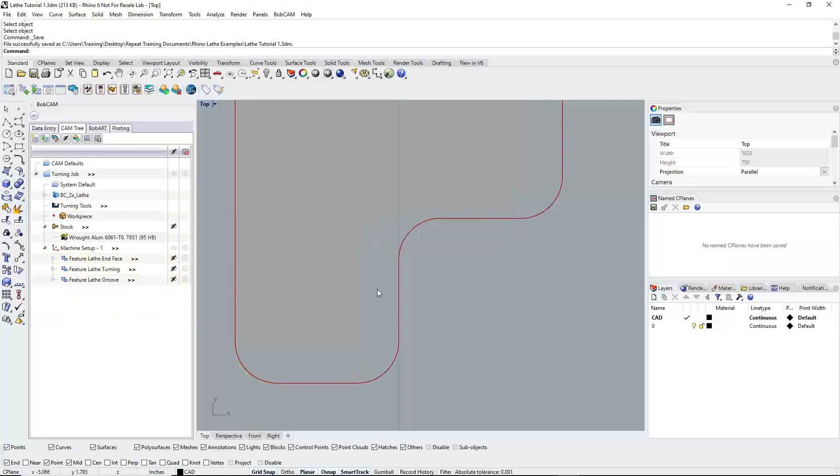All right, now we'll do our drill. So we're just going to right-click here, do our lathe hole, and we'll select our geometry. The geometry for this is really just the end point. So we're going to just pick that end point and hit OK for however deep we want to go. That's what we're defining, is the total depth. The diameter, this is 1 inch. I already set this drill up, so it should pick it for me, or if not, we can always pick it.

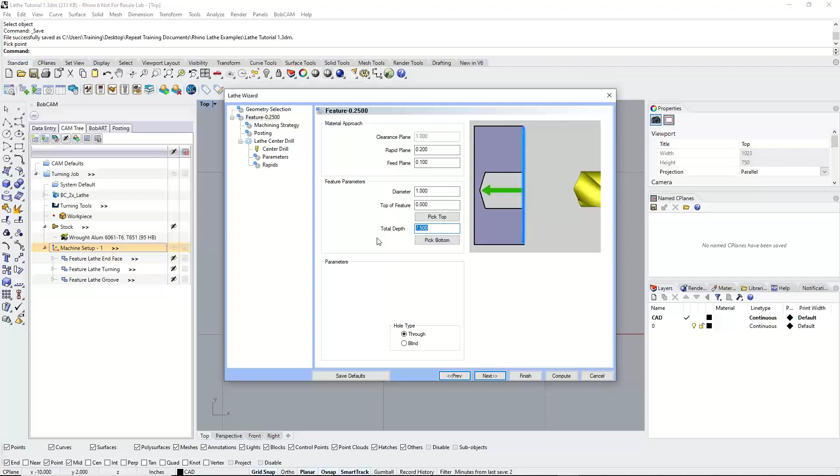Now you have a choice of doing a through hole or a blind hole. The difference between the two is a through hole adds 50 thousandths onto the total depth. A blind hole does not. We do still calculate the tip angle to make sure that the full diameter hole is 1.5 inches, but we don't add any extra on when you do a blind hole. So I'll just do a through hole, no big deal. For the strategy, I'm going to choose this lathe hole option, and that will give me a lathe center drill and a lathe drill. That's it.

For the posting, again, separate moves or canned cycles. I would say most post processors have the canned cycles for drilling, but it's just dependent on what's been done to that post, really. Next, we have our center drill. So it's my 3/4 inch 90-degree spot, the one I set up earlier. Next, right here, I could define either the depth that I want to center drill to, or the center diameter I want when this drill is done. So I could go in here and say, I want my center diameter to be a 1/2 inch wide.

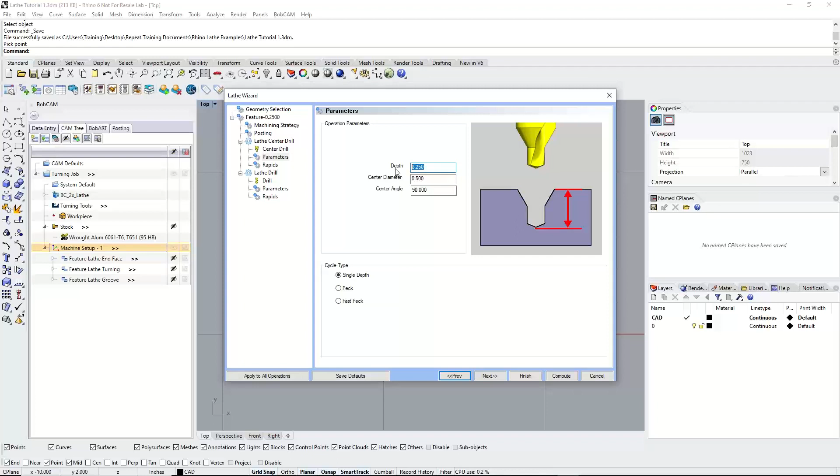And that means that with this 90-degree tool, we're going to go 1/4 inch deep. I could choose to do it as a single depth, just the full 1/4 inch in one shot, or I can peck or even fast peck my way in. Right here for the rapids, we got the default rapid on the approach and the exit.

For the lathe drill, we have our 1 inch drill, which looks like the tool I set up, but yeah, this should be it. Let me go to the tool crib. Let's look. It's the same exact tool. I'm going to go ahead and choose tool number 5. I don't know why it's making up these extra tools. I'll have to get with the dev team and look at it.

But yeah, from here, this is one of the only features we're doing that BobCAM is going to calculate the feeds and speeds because of the material over here. So it's calculating those feeds and speeds. For the parameters, we're going to tell it to use the cutting conditions. So if we remember, our total depth was 7.5. There's that extra 50 thou.

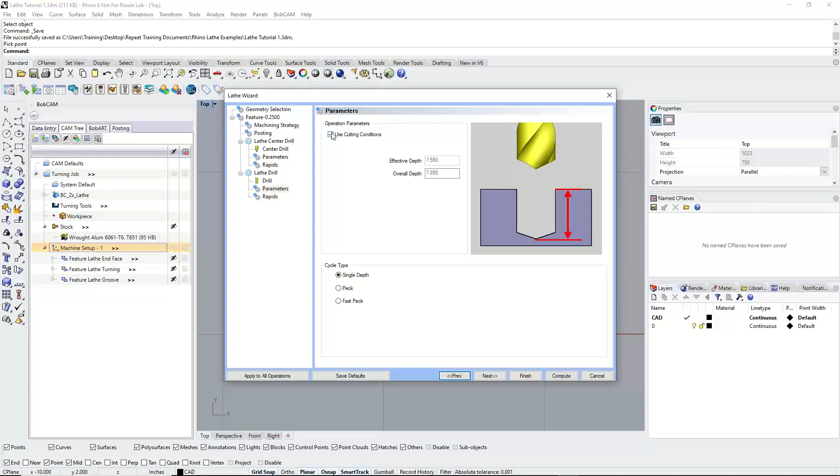And then you can see the tip is 300 thousandths on this. So this extra distance between these two, that's the difference between the full diameter to the tip. It's a 118-degree tip. So there it is. And it will actually adjust. If you were to change this to like a 135, it's actually a bit smaller now because it's a wider or kind of a flatter point on the tool.

All right, and then right here we can tell it, let's go ahead and peck that one, and we'll do 1/2 inch pecks. We're going to go 1/2 inch. And then finally the rapid's going to use the defaults. So I'm going to hit compute, and there's our drill. That one's always pretty quick. So now I'll just do a file save.

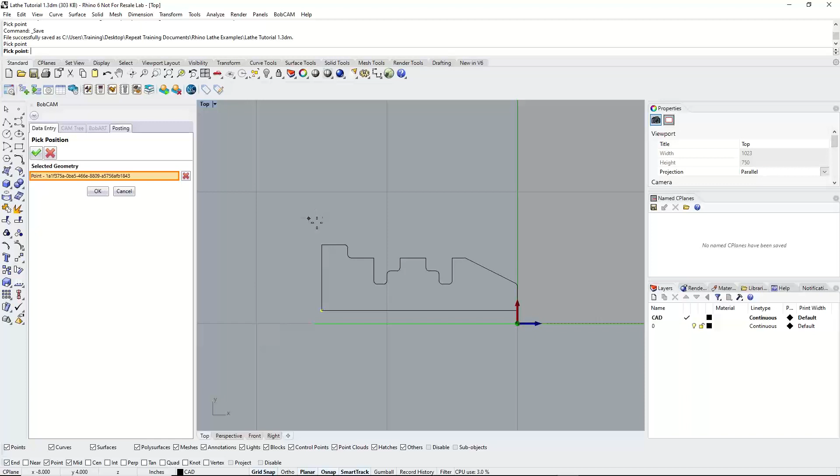And finally, the last one here should be the cutoff. So cutoff's going to work fine. We're just going to right click. Cutoff is pretty straightforward. It's the same thing as a drill. What you're picking is the point you want to cut off to. So this is defining what point back in Z we're cutting off at, and what depth we're going in X to do the cutoff. And you can actually change it.

So next, right here for the feature, we got our rapid plane. It's an OD cut because it's a cutoff. We could go from the stock, and that's it. Well, I will say, if your stock was bigger, say I had a 6.5 inch piece of stock, and I turned this all down to 6 inches. By going from stock, we're recognizing it at the 6.5.

It's on this parameters page here. If you ever go to use a corner break on this, you might need to come in and set your custom size stock. That's from the center line to where you want to go. So for me, it'd be 3 inches, from here 3 inches up to the outside of our part. But because we use stock that fits our part, we didn't make any bigger stock, we don't have to really mess with that at all. So just going to go next.

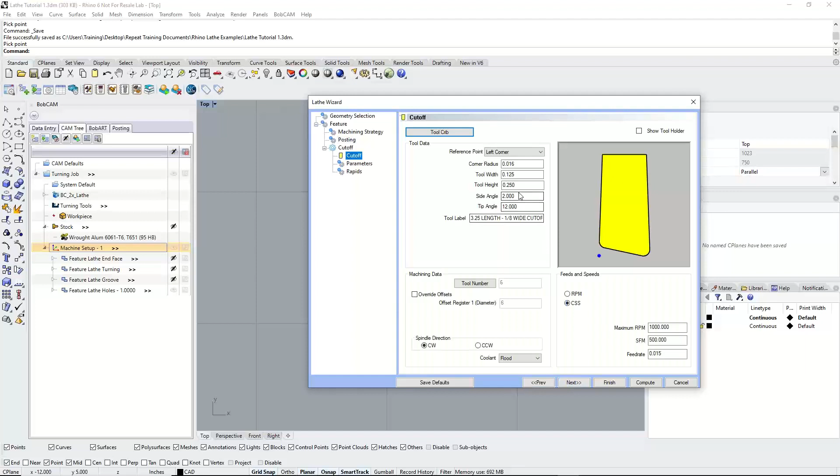For the strategy, we have our cutoff, posting separate moves or canned cycles, depends on the post. For the cutoff tool, we have our 3.25 cutoff tool. It looks like it didn't make up a tool for me this time, which is good news. It's the only one we got. Next, again, we have our parameters. So our Z cutoff is at -7.5. So that should be right there.

And then we're cutting it off to 0.49. So it's actually going down 10 thousandths lower than this. Doesn't really matter. But if we wanted to go a little further than that, that's the distance from the center line up. So if I say let's go 0.25, it's going to be from this center line up 1/4 inch. So we will make sure to cut all the way through that. And then your retract amount is what you retract to. So I leave it at 0 for this one.

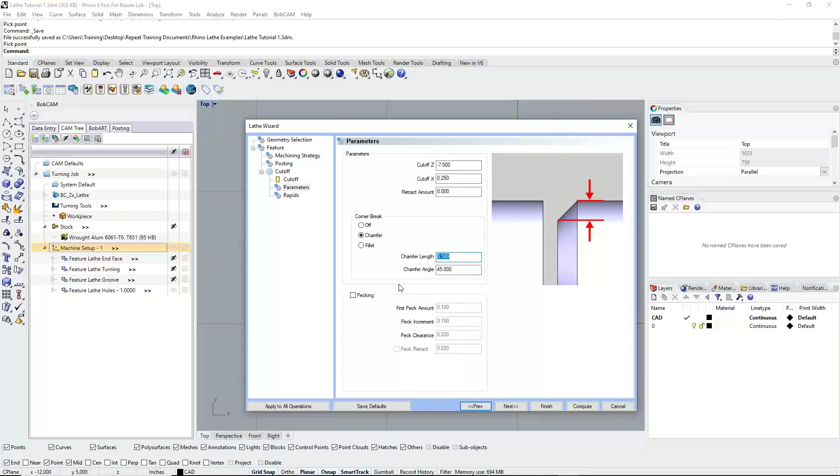We have a sharp corner on the part right there, but I'm going to go ahead and put a little chamfer on here. Just a 100 thousandths chamfer should be fine. And so that is just going to give us a nice little chamfer on the back of the part. Usually you'd want this drawn, but having it drawn doesn't change this toolpath at all.

Because remember, we just picked a point. So I can add this in or I can turn it off. It doesn't really matter. And then you can choose whether you're going to peck this out or just plunge straight in. And I'm going to go ahead and peck this. We'll do our 100 thousandths, and our clearance will just be 20. So as it pecks, it'll go 100, clear 20. Go 100, clear 20. All right.

And again, for the rapids, just going to use the defaults. So when we're all done, we can hit compute. And I'll do a save. And you'll see there is our cutoff right there. So that's our little chamfer move right there. And then that's our actual cutoff there. So it's going to come in. I believe it should do a half a cutoff, like it cuts off a little bit, comes back, moves over, does the chamfer, and then goes all the way down.

If you ever want to see that, you could run the simulation, but you could also backplot by right-clicking, not on the feature. You won't see backplot in this menu, but you go to the specific operation. So you'd only be able to see one of these at a time. I can backplot the rough or the finish. Or in our case, we could backplot the cutoff. So you just right-click on it and say backplot.

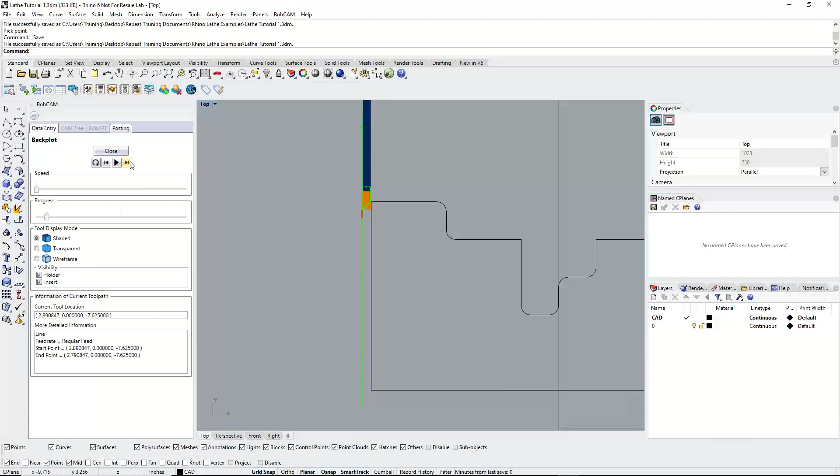And you'll see here it comes. It's going to go in. It's going to make its cut, retract a little bit, cut our chamfer, and then it's going to cut its way down. That's our pecking moves that we got going on. So there we have it.

All right, so looking at our cheat sheet over here, we just finished step 4 and 5. Step 4 was go make all your tool paths. Step 5 is repeat that and make as many tool paths as you need. The next one down is the machining order. All right, so we're going to make sure to check the machining order.

Now, the machining order is found by right-clicking on the turning job. So really the top level of the job, not CAM defaults, it's not in there, but right below that, you got your machining order. And if you're ever looking for something, like you can't find the machining order, start at the top and right-click. It's not in there, okay, right-click on that one. Oh, it's in there. But you can go in and make any changes by right-clicking on these things, all right? So I'm going to right-click and go down to my machining order.

Now, the way I should have this right now, let me look at this. We got our lathe end face, and then we go to rough it, and then we do our lathe end face finish, and then we go to finish the turn. So the way it's sorted right now is by using this option. It's either one of these. I only have one machine set up with turning. It's individual tool, meaning it's going to try and keep tool 1 running as long as it can. Then it's going to switch to tool 2 and run it as long as it can.

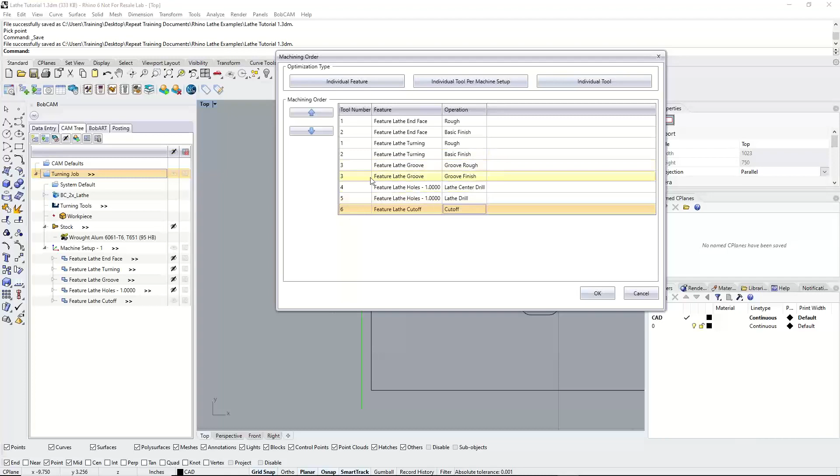We groove it, we center drill and drill it, and we do the cutoff. And the reason that didn't change is because we're not sharing any tools, and it's not going to put the finish before the groove rough, so it all works out. So we'll just hit OK. And then I'm just going to go ahead and blank out that tool path, and that's it right there. Let's go ahead and say File Save. So that was step number 6.

Whoops. So step number 7 is verify your tool assignment. So I mentioned this earlier. I don't mess with the tool numbering until the end of the job. And so I right-click here on turning tools, and I'm going to go down to verify tool assignment.

Now, the first thing I want to look at in here is, are all the tools I planned on using the ones that are in here? I usually get that all worked out while I'm doing my features, so it's usually not a problem. But you definitely have to pay attention to this because we saw it a few minutes ago. It made up some of these tools.

What happens sometimes is the tool can be a different tool, even if the only difference between them is it's a little longer, which makes sense. They're different things. They're not the same length, all that stuff. But when we're doing this, we just want to make sure we have the one tool. The tool we want to use is really all I'm trying to say here. You want to find the tool that you planned on using.

So there's my CNMG, there's my VNMG. I got my 1/8 inch grooving tool, my 3/4 inch spot drill, my 1 inch drill, and my 3.25 length cutoff tool. So it looks good. I got no complaints. Everything matched up fine.

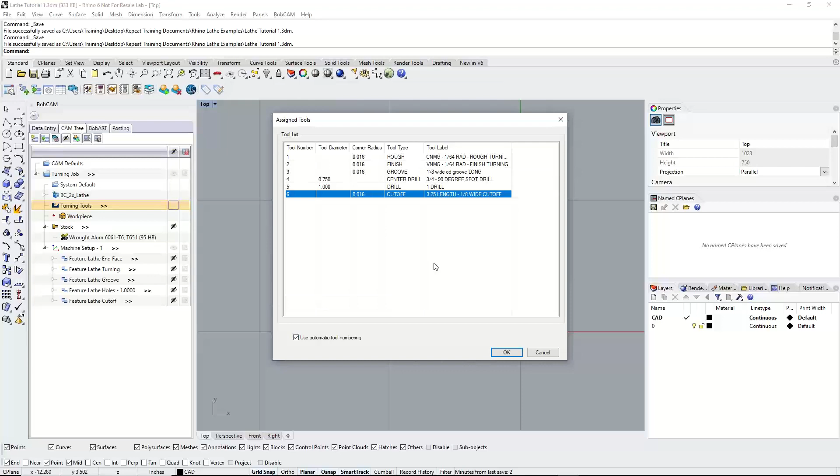But you could also change the tool numbers just by double clicking on them. So you could say this first tool is actually going to be sitting in slot, I don't know, 2. Maybe you have a certain tool in slot 1 all the time. But the use automatic tool numbering is going to number the tools in the exact order they're used. So first is first, last is last. So the 6th tool is number 6 because it's the last tool used. But again, you can uncheck this and make any changes to the tool number. So hit OK. All right, we're on to the good stuff.

Now, the next step is simulate the final program. If you find any problems, go back to step 4. So go back and start editing the parameters in the CAM wizard. I'm not anticipating any problems with this one. I'm thinking we're doing a pretty good job. So we'll say save first. Always, always, always save before you launch that simulation. Everyone's going to get burned at some point. You're gonna lose something, but always save before you load the simulation.

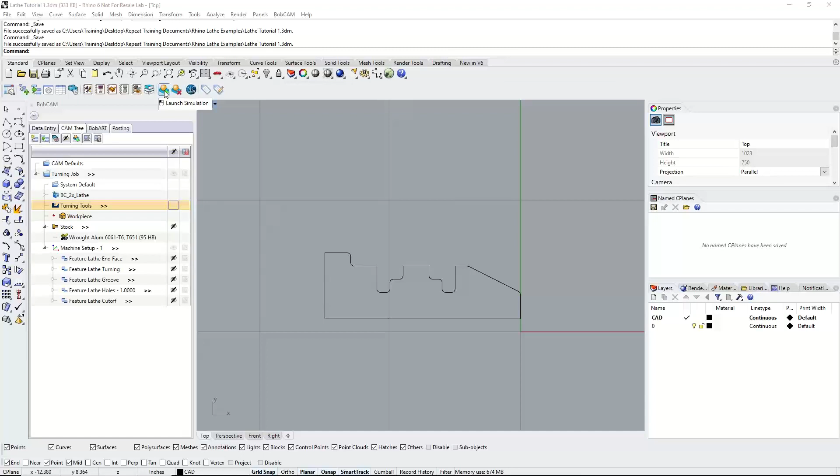It's like one of the hardest hits on the system, and the way my computer has been acting the past couple days, we're going to go for it. So I'm going to say launch simulation. I got my fingers crossed.

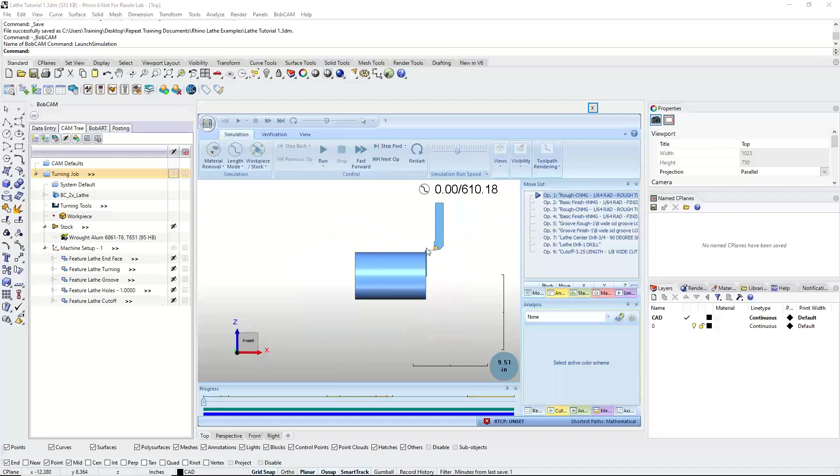All right. So simulation launches. You can view it however you want. I'm going to do one quick change here. What is this under options? I believe it's graphics and background. I want to turn off the machine center point there. I don't need that. There we go. All right, good. So the way I usually watch my turning parts is I go to the views here and I go to a front view, which is basically how I've been staring at this part this whole time. So it makes my life a little easier.

If you have any cuts that are being done on the ID, another thing you can do is right here, hold on, let me move this properties window over a bit. Just a little, not much. That's good. There we go. So on this visibility tab, I have my stock, and currently it's set to show. But if I'm doing any cuts down the center of the part, what we can do is turn it transparent. And you'll still see the OD cuts happening, so I don't want to run too fast with this. You'll still see all those OD cuts running.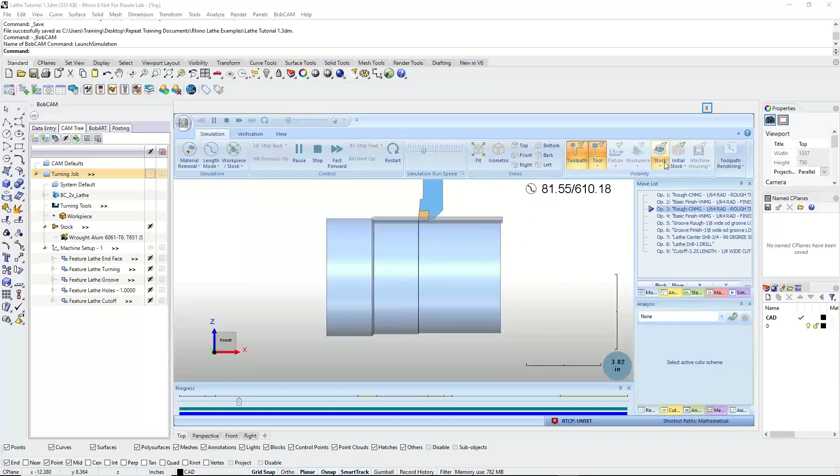Like that, but you'll actually see the drill cutting through the inside. This is one of my favorite ways to look at it. You could also just turn it to show that way, it gives it kind of that deeper color.

There we have it - my rendering, current op, segment, good. As I'm cutting with these settings under the toolpath rendering and segment settings, you'll see the toolpath disappear. It's just showing me a segment of the toolpath at a time, and it clears it away in between each one.

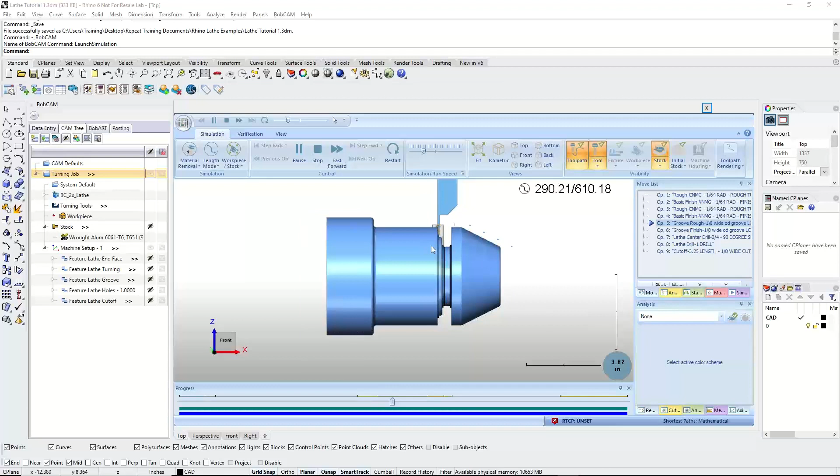Okay, got it. So there's our initial rough pass, there's our finish pass - I'd probably switch that to the CNMG. And then there's our groove, we probably would want to be pecking this one out, so that's another change I might need to make. But you'll see it left the radius material in there for the finish to put that radius on for us, and we're just going to go in and cut the second groove here.

Right there, and then the finish comes in - nice clean cut, finish comes in. Again, you could do those grooves with a different type of finish pass as well.

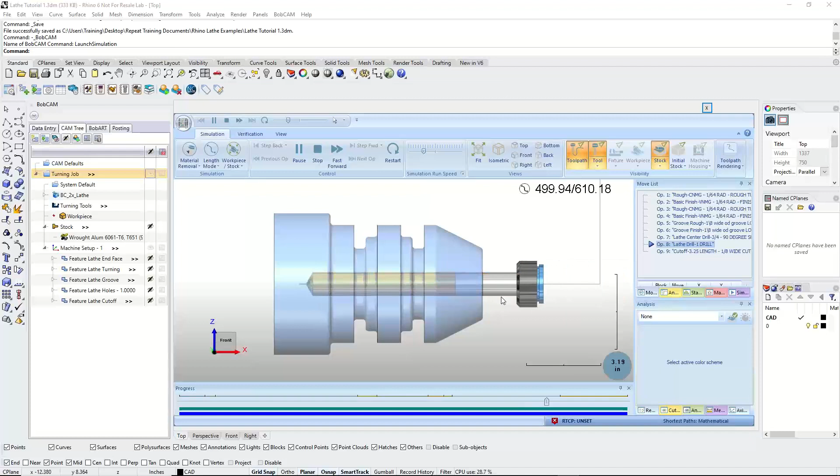There it is, and then we're going to go in - we've put our chamfer on the back of the cutoff there. We ran really fast, let me stop this and restart, and I'm just going to fast forward right to the cutoff here so we can see it again. So it's going to go in, it's going to plunge in a little, make our chamfer, and then it's just going to cut right down there.

And we have that peck amount in there, so it's just going to peck its way through right there. Part's free. And then one last thing you could do, and it's up to you if you do this...

If you want to see what the back of this thing looks like, over here under this measure tab - let me move this over a little bit - there's this measure tab right here on the bottom set of toolbars, what do we call it... yeah, toolbars, docking panes. There's a bunch of options in it.

You can use it to take measurements, which I wouldn't recommend - it's not super accurate or anything. But right here you have this remove chips option, and so I'm going to go right here and say remove chips, only keep one part. This allows me to use my middle mouse wheel like it's a button, and click on the part that you want to keep. So I click on that right there, and it removes anything else.

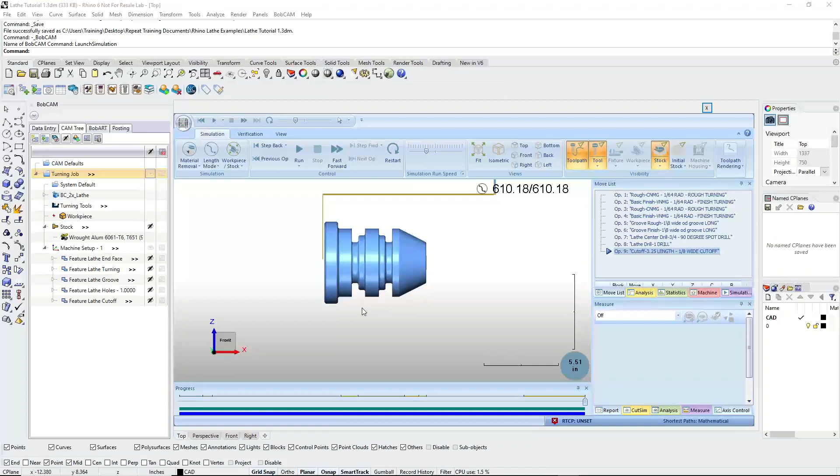Here's the thing - make sure to turn this off when you're done. Because in the simulation, to rotate, it's a left click, hold, and drag your cursor. If we're inside Rhino in the perspective view, you rotate using your middle mouse wheel. So a lot of times, and I've done this before and had many customers do it, you'll come here to go rotate, click that middle mouse wheel down, and it'll delete the part off the screen. So just make sure to turn this off again so that doesn't happen.

But now you can see there it is - we got our hole down the center. Overall, go to a front view or a top view, it doesn't really matter, it's all the same part at this point. But there it is, looks good.

So we're just going to close out of the simulation. I have no complaints with that - everything looked pretty clean. And so now step number 9 is we post the code.

So, whoops, get out of there. So posting the code, the first thing you do - again, I said this at the beginning - the BC2X lathe is a fine machine to use. There's no, you don't have to worry about the machine that's being used.

The important bit is when you expand this here, you have the correct post processor. I have this single line post. If I go in here, well, let me do that again. I don't want to skip a step.

You right click on it and say edit, then go right here to select the post processor. There are a bunch of them in here already, like Mazatrols and Anilams. But if you don't see something that works for yours, these are all the posts we'd call OEM posts, and they work for most of these machines. So if you have a Haas lathe, the Haas lathe or the Haas 2X lathe will probably run your machine.

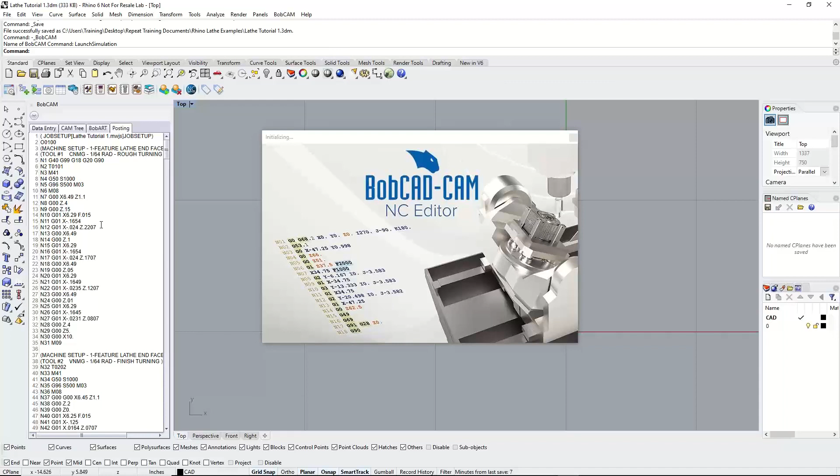The NC editor is essentially just a text editor, but it also has syntax highlighting built into it, which is nice. So all your G commands will be a certain color highlighted, your N's are a certain color, your Z's are a certain color. All that stuff comes down with a specific color, so it's easier to see and easier to kind of spot.

If you do make any changes through here, you can just go to File, Save, and then Save As. Just make sure when you save it, you're saving it as the correct file extension. The NC editor's file extension is separate from BobCAD's file extension.

So you right click in here, you say save as, and you'd save the code to a flash drive or onto your network, however you get it out to the machine. Right after you hit save as, it's business as usual—however you get that part out to the machine or that code out to the machine, that's what you're going to do.

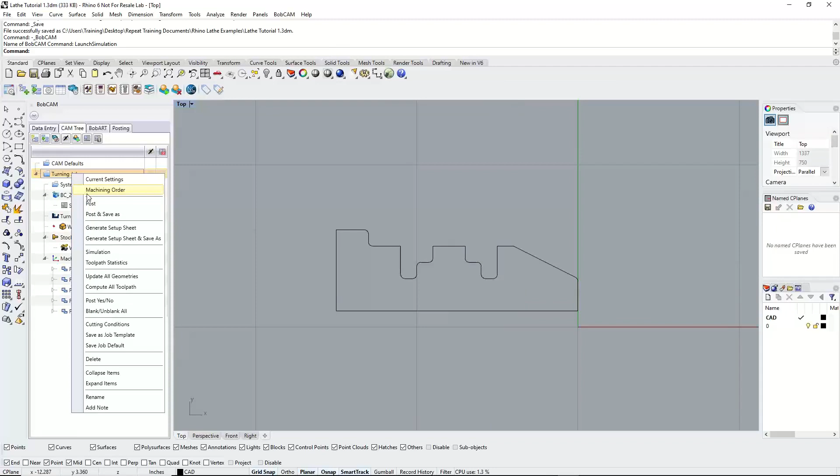Finally, the last step they have in here is generate a setup sheet. You generate setup sheets by going to your CAM tree, right-clicking on your turning job, and right down here we have generate setup sheet.

I don't think there's a shortcut for that anywhere. No, there's not. Yeah, there's nothing in there.

The way I usually do this in the standalone version of BobCAD, we have a button up at the top on the toolbar. I don't think I can add to this toolbar—I'm almost positive. Yeah, I can. So what I like to do is when you do this setup sheet, we actually do a screenshot of the part.

So the way I usually run this is I turn my stock on, and then I try to get it to show this, but as soon as I click off the turning, as soon as I click off the machine setup, it'll disappear on me. But we'll generate our setup sheet. Let me get this centered on here nicely, because we're going to actually take a screenshot of this.

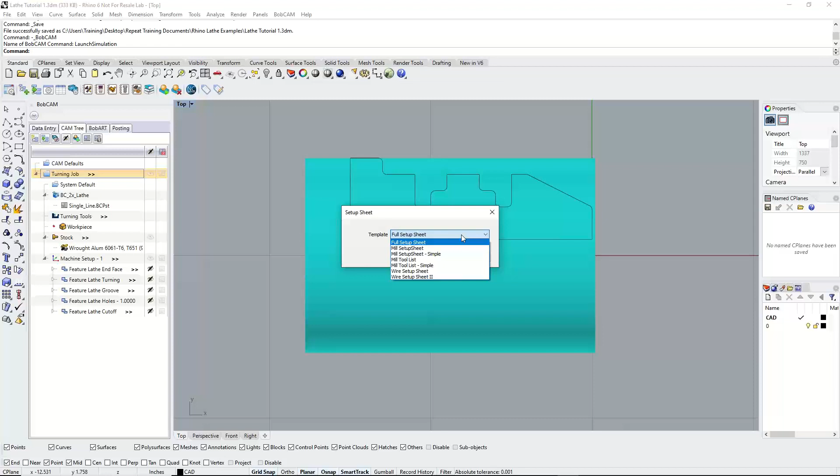So we're going to generate our setup sheet. Now there's a bunch of setup sheets, but you'll notice a lot of them are for mill or wire. The only one we want to use is the full setup sheet. So you're just going to pick that and hit OK.

And you're just going to wait. This is going to load inside of Internet Explorer, or let's just double check—inside the settings now, you can set up a browser. You can actually say use the default browser or go and pick the browser. The reason is on Windows 11, they finally got rid of Internet Explorer, so you need to be able to pick a browser for it.

So just so you know, I don't need that. And so it loads up here in Internet Explorer. We make that big, and you'll see it's got the name of the file there, the post processor, the machine, the date and time, your program number, your units, total cutting distance, total rapid distance, number of operations, number of tools, number of setups, and the total cycle time.

Now, cycle time is all calculated based on the feeds and speeds that we set up, and we didn't really set up many feeds and speeds. So you definitely want to go through and make sure to get your feeds and speeds right, and then that will be a pretty accurate number.

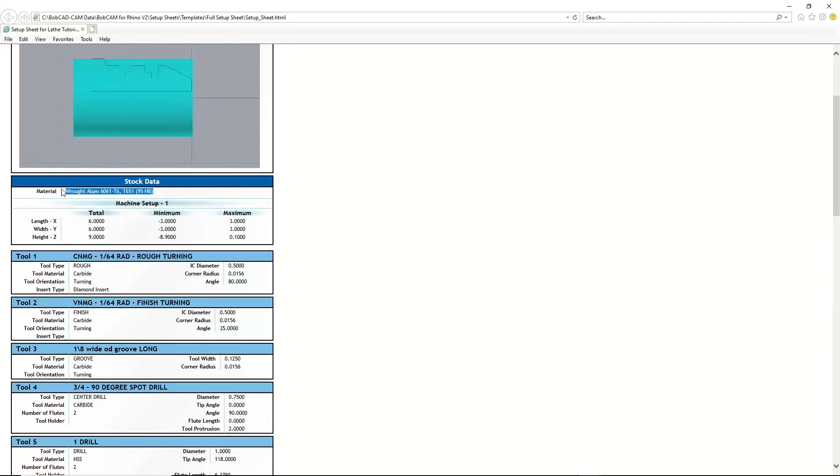Got our material listed there. We got our length, width, height of the stock. We have our tools, all right? So we have a breakdown of what the tool is on each one. We got the name of it and everything. Basically, if you were the one just programming this and you weren't going to be the one machining it, with this setup sheet, it really does tell you just about everything you need to know about how we cut the part. Down below all the tools, you actually see what order we do all of our operations in. So you got to see everything.

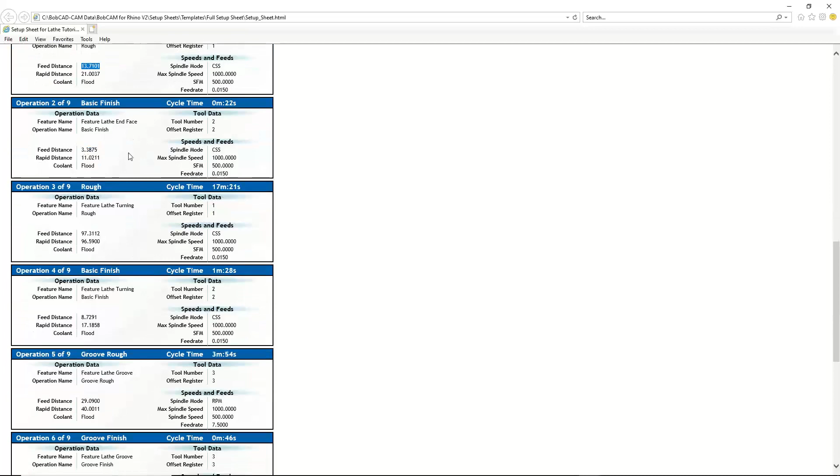So our initial rough at these feeds and speeds is 1 minute, 27 seconds. The way that we do this calculation is we have this feed rate and we have our feed distance. So we just divide them up and that's how we know it works. So you got your finish. You look at that, 17 minutes on that rough. But yeah, right there, all of our tools, the cutoff, everything.

Now to save this, there's no save on here that I know of. I guess there is a save as, I've never used that. So you right click in here and just say print. And then what I use, because I'm on Windows 10 here on this PC, but I believe Windows, I know Windows 8 had it, I don't know about Windows 11, but I don't think they took it away, you have your Microsoft Print to PDF. So you pick that, you say print, you wait a second, and then right there it pops up.

Let me find my folder for this. RHINO, lathe examples. There we go. And so I'd give it a name. So this is Lathe Tutorial 1. And then I could just say save.

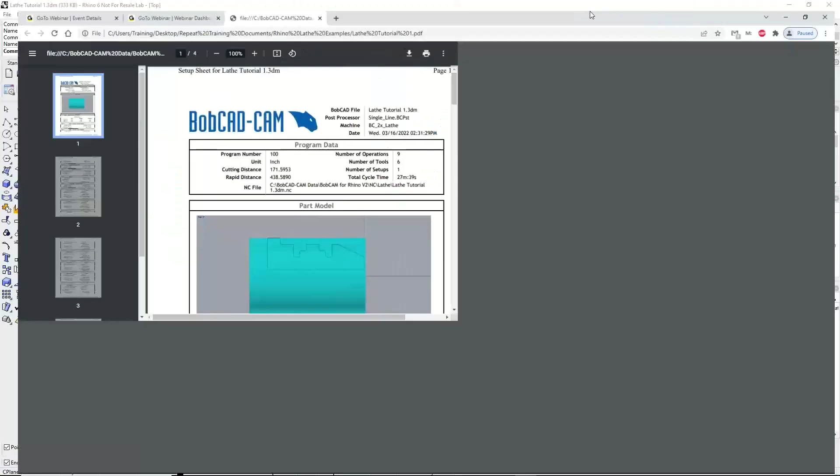So now if I ever need this again, after I close it out, all I have to do is open up that folder. Where'd it go? There it is. Open up that folder, go down to my examples, and right here, the PDF, I could open it up. And there it is. So I'd be able to print it out later on, do whatever I need to with it. All right, so close that, go over there.

All right, so that's kind of the last step to it. And we have a fully finished part. Got our code and everything. So that's it. I'm going to show you guys the website, the posting real quick, just in case you don't know about it. And then, yeah, that'll be pretty much it for the day.

So this right here, I'm using Google Chrome. I don't recommend using Internet Explorer or what is the new one, Edge, Microsoft Edge. I've had people talk about not being able to download posts and stuff. But the website we're going to go to is just bobcadsupport.com. And I've actually never logged into it with this Google Chrome here. So I'm not even going to sign in.

First thing I want to show you is the training section, because that's my thing. So when you go to training, all these recorded events, so I know a couple of you guys showed up a little late, we didn't really do much. I actually started late because my computer decided to restart. But if we go down right here to the recorded virtual events schedule, you guys are actually able to watch all of these. Now, I know you're using this RHINO plugin, which is cool.

But the big thing that if you guys can make the connection, I've had a couple guys do it now, the CAM is the same between all of our versions. So our version 34 standalone system, our SolidWorks system, and our RHINO system, they all use the exact same CAM. All the steps that you do, all the geometry that you pick, minor differences, like the RHINO or inside of SolidWorks when you do turning, you don't use wireframe, you use solids, you use the surfaces. But all the settings are the same. Everything is the same. So if you want to expand a little bit more on this and you can make that connection, all these videos are fair game for you guys. You can watch any single one of these. They got V9, V34. The only difference would be anything that's done as CAD, like V34 here. I'm not good with SolidWorks or RHINO.

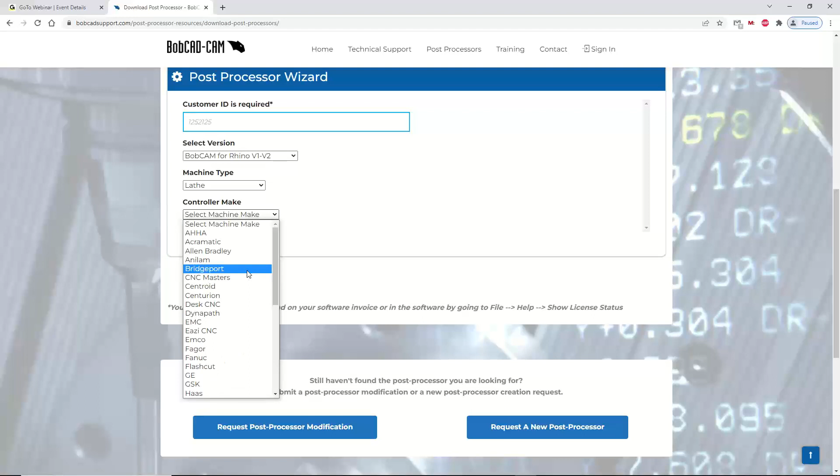And then right here's all the different lathe controllers that we have. So let's say something that's going to have a good amount, like Fanuc. And you'll see here's all the Fanuc posts that we have. So yeah, you're just going to have to look at it, pick a post and it'll show you a little sample there. You kind of want to look to what matches the type of code you're used to. But yeah, that's pretty much it.

Then you hit download. Now, if the post you download or the post you're using inside the software isn't right, then you can request a change to the post processor. So requesting a post processor modification or requesting a completely new one. Most people just need to do a modification. But it's up to you. If you can't find your machine in post at all, then yeah, we'll make you a fresh one.

If you decide you need to make a new post or you want to request a modification, there's a couple things we need. Now, modification-wise, it's going to be really a sample program. It all depends on what needs to be modified. But a lot of times, the way we do these posts is if you send us a sample code that runs on the machine, we're going to make a post that pretty much matches it. As far as canned cycles go, you need to provide the examples of the canned cycles for us to be able to match up to those. So there's a little bit to it, but shouldn't be too bad.